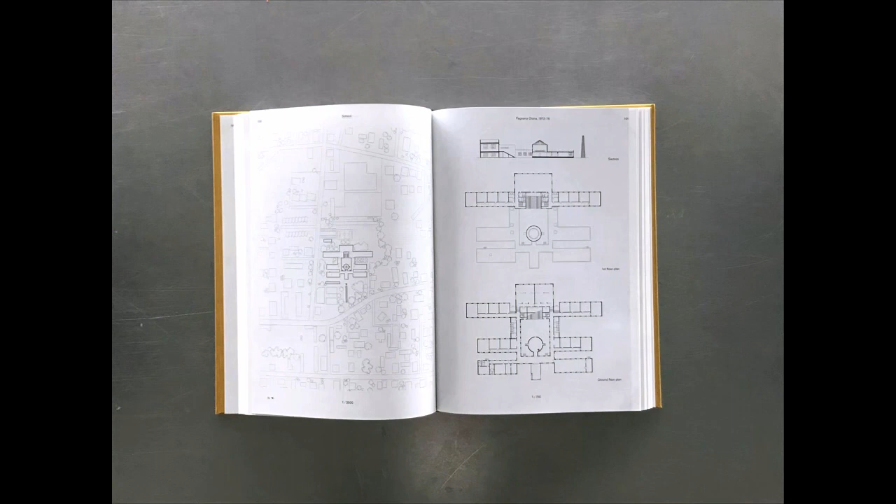One of these, from a few years ago, is called The Urban Fact — the better English translation of Fatto Urbano, commonly translated as The Urban Artifact by Aldo Rossi. We try to connect his ideas of architecture of the city not so much to city restructuring, but to the fact that in that era, 1966 and the 10-15 years after, he was essentially working in Lombardy, what you could call in French the pavillonnaire, or the ephemeral city, or the covered field, or the large city.

In other words, the work or the imaginary of an idea of architecture and the city through architecture — I think this school is an extremely beautiful example of that, the Fagnano Olona school, perhaps one of his best works of that time. Each of these works tries to introduce a moment of urbanity through an architectural figure, somewhere between an urban trope and a large house.

Here you see some pictures done by Stefano Graziani, with whom we did this show for Finstral last year, and with whom we work very often together, next to Bas Princen, who did a show here once, already more than 15 years ago.

These pictures of this particularly weird school, with its own geometry and symmetries, and how it's placed in a context which seems in full ignorance of these symmetries, I believe has been important for us. Now, of course, we did not start working on architecture after seeing that school — it somehow coincided, but I thought it was important to share.

Another element, and it's about putting flags, of course — another thing I wanted to share with you is a more recent publication.

I think it's from last year, where we worked, through Mendrisio, on Aldo van Eyck and Hannie van Eyck. We specifically wanted to work on architects I always considered quite far away from our own practice, but also on their work after the orphanage. I think any of you know the orphanage, an interesting place, but in a certain sense also killed by its own publicity — structuralism, Team 10, we all know it.

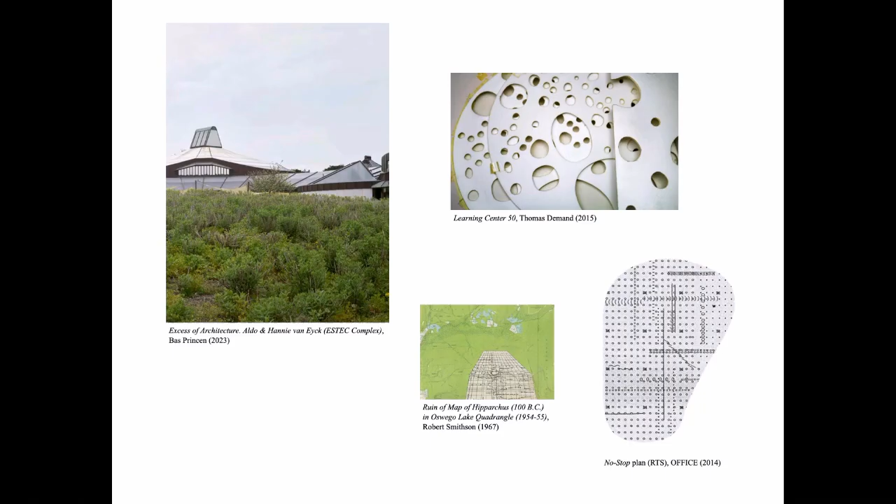So we're in Switzerland. I guess Switzerland, maybe not so much for you people here in Austria, but for us Belgians, Switzerland is this really, really beautiful place with mountains. Of course, you have less of that problem, I can imagine. But we have that in our mind. I realize here the mountains are perhaps even more beautiful, so I think you're safe.

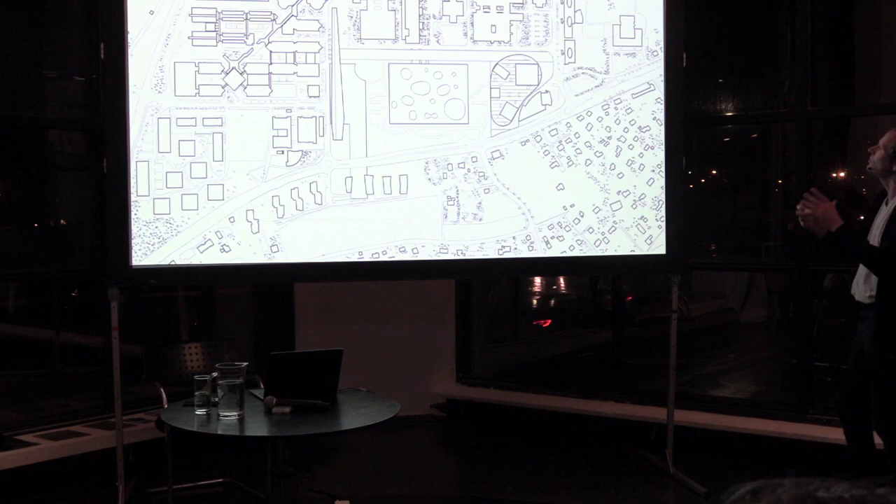But either way, you have this campus, and in a way this fantastic building, very well known, by SANAA, the Learning Center.

You have this pavillonnaire, and you have all this kind of motherboard-like context of endless conurbations and additions of educational facilities. In this competition, we were asked to make a design for a radio and television building, which is strange because it's in a way the only building which doesn't belong to campus. It's not an educational facility.

At the same time, we felt it was perhaps the only place where we could reflect upon this total urbanization of its context, because despite the fact that there are mountains, Switzerland is just endlessly occupied. So the proposal we made was this endless working space, which you see here.

This is the model of the competition, somehow carried by boxes and also interrupted by these very boxes. So you could say somewhere between these two very famous, well-known models. Here you see it collaged inside. You see a couple of versions.

That's one of the early versions where there's a couple of émergences, as we call them in French, a couple of volumes carrying this ear shape. The ear shape is there because the site is like that.

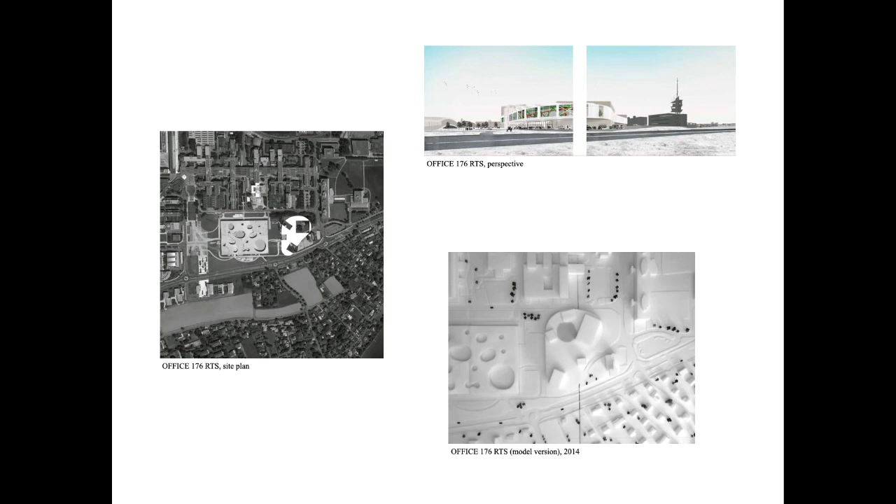In a way, I guess we wanted to round the corners in order to make it as endless as we could, not to have abrupt cuts, so that the cuts made by the volumes themselves were more present. Now the cutting itself, and it's a theme which comes back, was important for us, and it's this kind of interruption.

You saw it also in the Campo Marzio reference, which I went over quite quickly, but you see it very much in all these works of Baldessari, and here perhaps this one the most clear, this square he puts in the scene, and you don't understand the scene is under tension, and in some way the scene becomes field-like.

So here you see that. There was, of course, another theme, perhaps, that kind of inversion of the learning center, you could say, turning it into a far more pragmatic building.

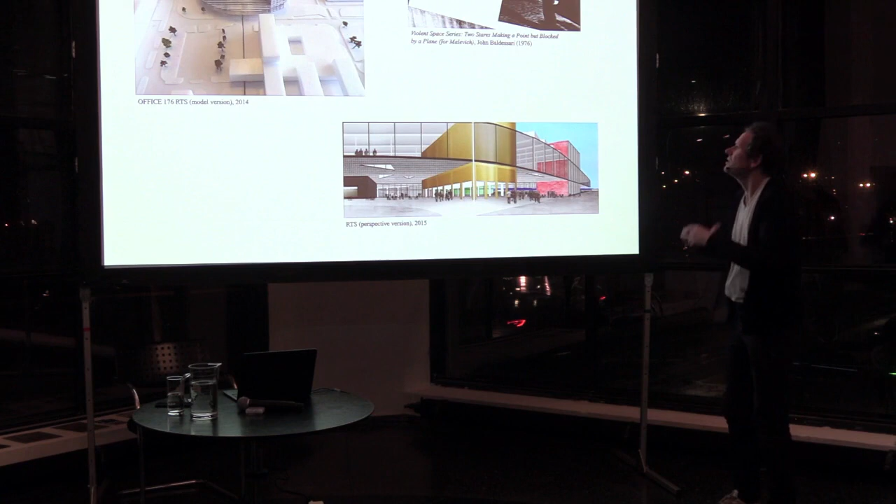I love the learning center, but in some way it's an extremely open, light building where not so much has to happen. In our building, of course, it's a place of production. It's radio and television—there's a lot of kinds of production, but it's a lot of that.

So this developed, and I'd argue that in a sense it's a building without exterior. It's just in a sense an endless interior, carried and interrupted by these volumes, an exercise simply in: if architecture becomes the world, what can you do?

So in a way you have open space and you have enclosed space. You have boxes in which things happen, which can only happen in boxes, which need protection, sound protection, organization, spatial organization—things which also, by the way, change.

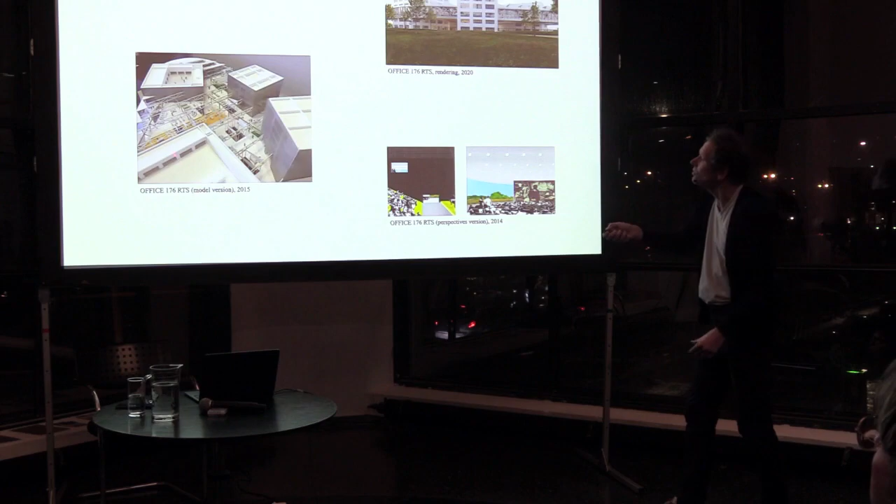As I said, we won the competition now 9.5 years ago, and then we went through processes and processes, and that's also why I like to show these different images of different stages. This is a fairly early version, 2015, 2014, I think you saw before—I have to check—but this one, 2014 again, and then 2020: basically the building as it had landed, as we finally designed it for the client.

So what I find interesting in this is that it defines—and it's weird perhaps to start with such a big building—our kind of toolbox as architects, which is on the one hand a very, I would say, obsessive formalism, this kind of four squares or rectangles carrying this ear.

At the same time, these squares and rectangles endlessly transforming and changing, because we never know what happens inside, because media has already changed so much over time. At the same time, allowing somehow in its formalism that change.

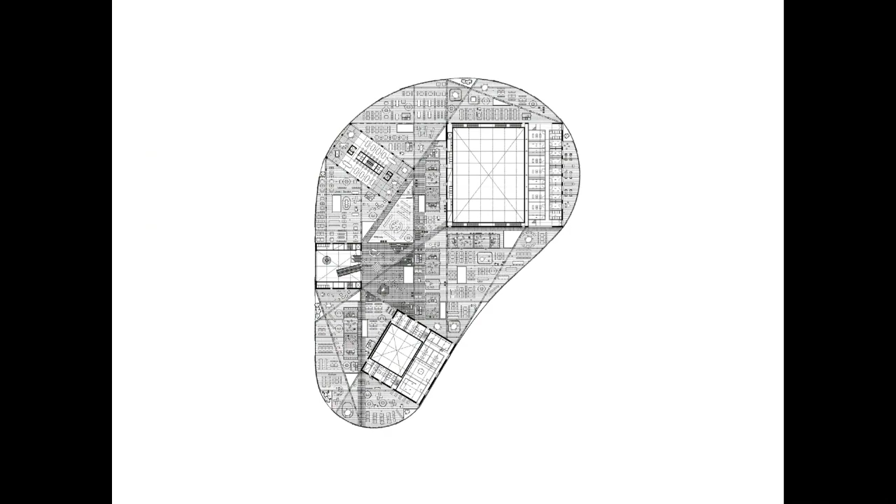So here you see it on the ground floor. Now, if you want to know—I guess it's everywhere the same. I mean, not yet in Belgium, I'll come back to that, but in Switzerland they have come to the idea...

...that you don't even need real editing spaces and recording spaces anymore. You just have big halls, and then the recording and editing trucks park next to them, go to the garage, are repaired, and the moment a certain event is finished, they drive somewhere else for the news or something.

So in a weird way, this building becomes partly a production of content, partly almost like a fire brigade—big trucks locked in, almost like plug-in city in some sense. And then somehow, a mixture between campus-like buildings, blocks, and this big field on top, as you just saw.

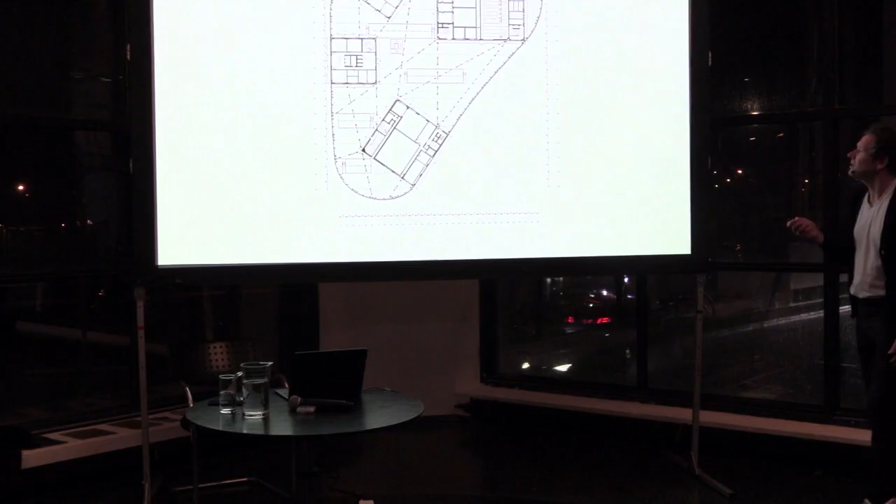So here you see it is now under execution, these are the sections that still think of the competition. Here, in a way, are the images we had to make for the client to help them understand what we're actually building at this moment. Interesting for me is this idea that a building which is entirely rational, entirely open and entirely closed at the same time, ends up like this.

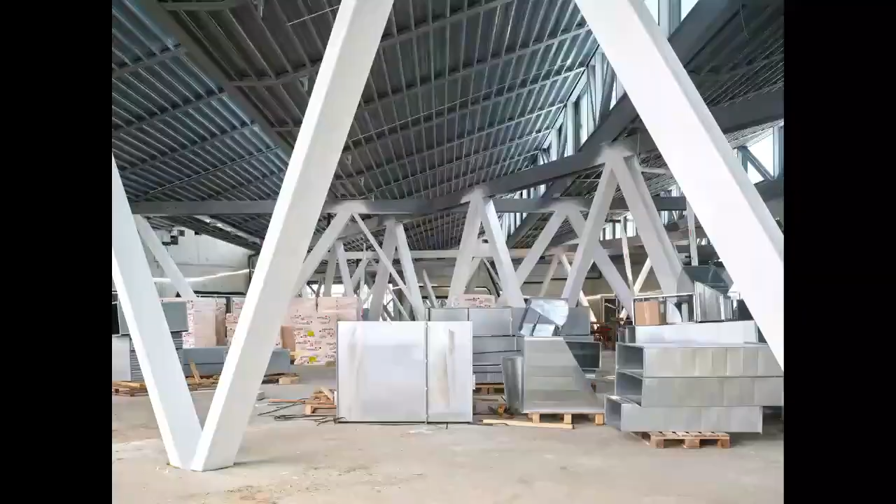These are construction site pictures by Bas Princen, where you see this multiplication of everything: multiplication of beams, sheds, and now temporary pieces still to be installed, the ducts and installations. But all this is a kind of hypothetical answer on the biggest possible scale of what happens if a building becomes a city.

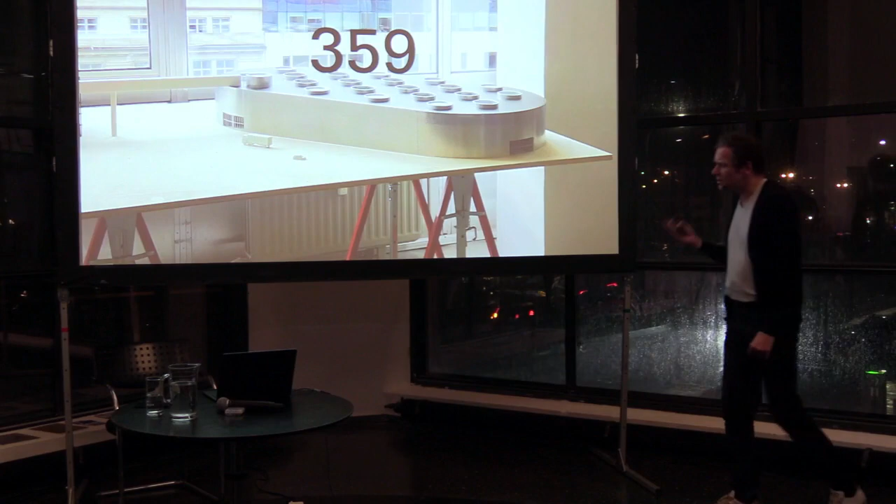Where we were asked - it's a French-speaking part of Belgium - to think of a new building for a satellite factory, so a factory which makes satellites. In a context like this, everything goes on the one hand, but I believe the building you make has a certain sense of responsibility. So what can you do? Is there still an action you can make? Is there still a maneuver which makes your building more reasonable than any other one, you could argue?

So here we come - I don't know if we succeeded, we will start building it I think in about 4 weeks. In a sense Charleroi, and here some references, has this beauty which is also, according to many people, its ugliness - the fact that everything is artificial, even the landscape. But since these terrils have been left alone for about 50 years, because nobody knew what to do with them, they became natural themselves - all kinds of plants and trees growing on them, and now they're even part of big trails and so forth.

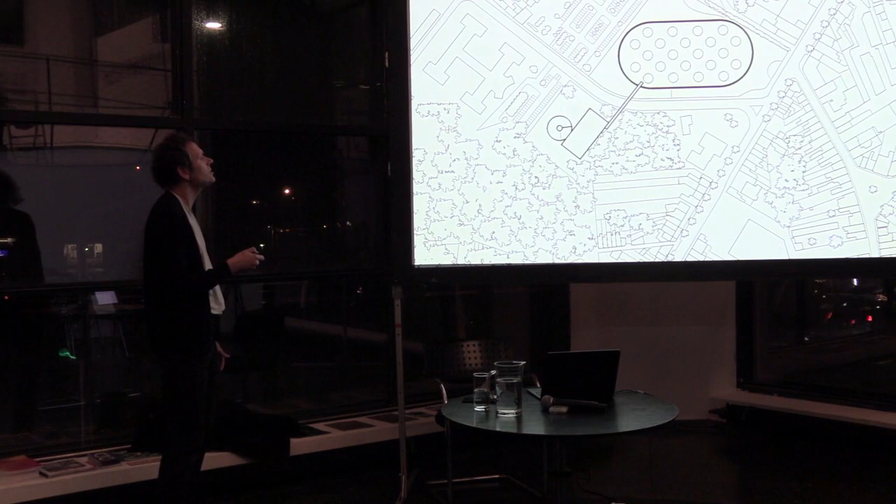The site was given to us, but we had to convince people - the mayor, who I think is a very enlightened figure, plus the people investing in this satellite factory. It's a kind of startup growing very fast, a sign of this new economy in this part of Belgium - to make their big salle blanche, a big white hall to make satellites here, to negotiate the figure of the building, to put the offices on top rather than on the other side where they initially thought, and to keep a building I'll show you in a minute.

It was an old office building from the 60s, a very beautiful building with an exoskeleton in corten steel. We used it as a parking lot, as you can see here, with the ramp we added, rather than getting rid of all these beautiful trees here - in this patch of Charleroi, every tree counts, every piece, even if it's an artificial landscape, we should keep.

So in a sense, densifying everything by transforming a building which was in a way unsavable - because insulating this exoskeleton would be impossible - turning it into a parking garage, making a bridge, and putting the offices on top of this building. So here you see an idea of the scale of what we've been working on.

I can skip this quickly, but it was important for us to understand better what we were doing. We had been working on a project in Bordeaux - we won a competition years ago, but it never got built, a kind of weird industrial building there. Somehow it echoed here in this project in Charleroi - this picture of the corten steel building, very beautiful at the time, now totally derelict, sadly so.

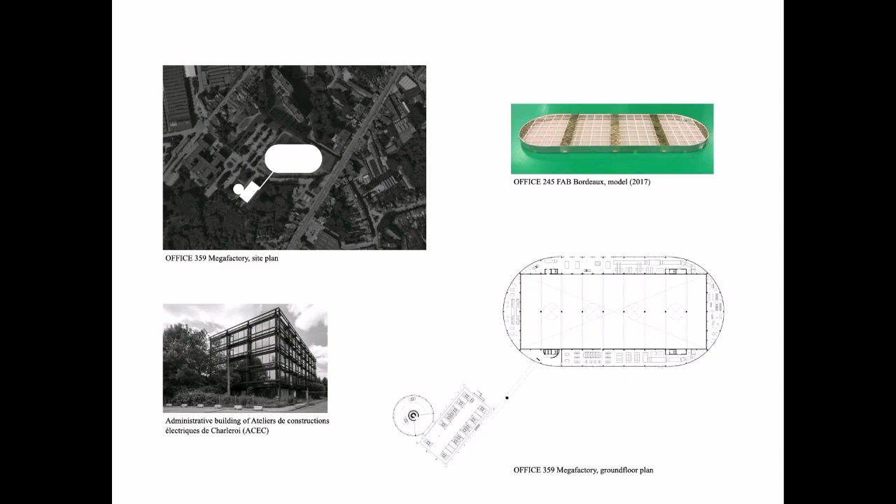So here's the scheme, as I explained before, with the urban scheme. Here's the plan - you see the top floor with all its holes, which is the office floor, and then the parking garage next to it. Here you see that again in detail.

You see, we'll come back to that crematorium later, which somehow explained how we saw the materialization. It's all very cheap - we're not working like the Switzerland of before. It's a very cheap building, but for that reason equally urgent, differently urgent perhaps - and then indeed this salle blanche included in this bigger pill shape, with the offices on top.

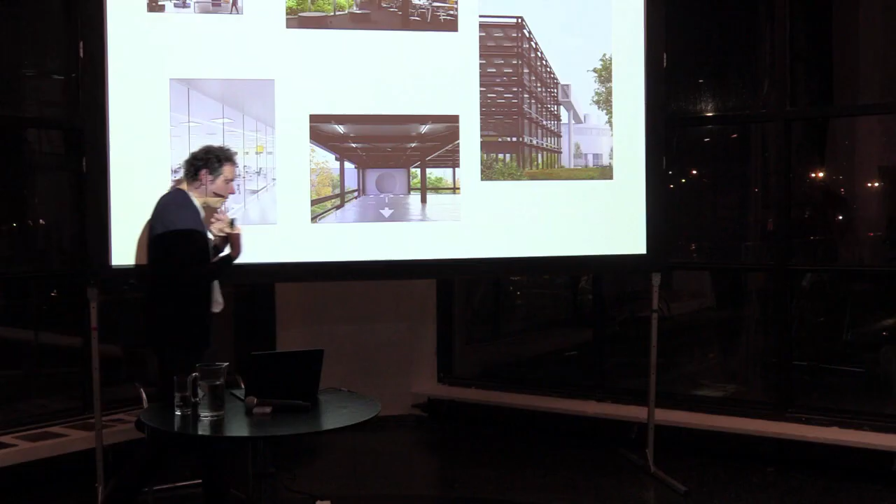So here you see an image of the top of the offices - the difference between the outer envelope and the bigger box, which creates these spaces on the ground floor, the view of the salle blanche, and a view of the building transformed into a garage with its bridge. The building looks almost like it was, but with all the windows taken away, simplified, and through that facing its new life.

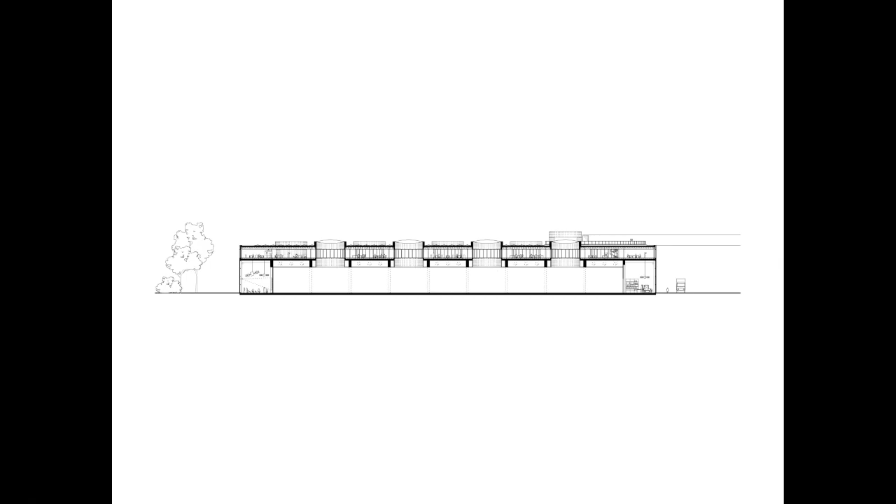So here you see that - where this big figure, like a gigantic box, is in a way the potential answer to that weird context. So I think a picture here - we see through to inside, the place where they make the satellites, and the offices above. I wanted to show it because it's almost the inverse of what you saw before, but yet I think it deals with similar topics.

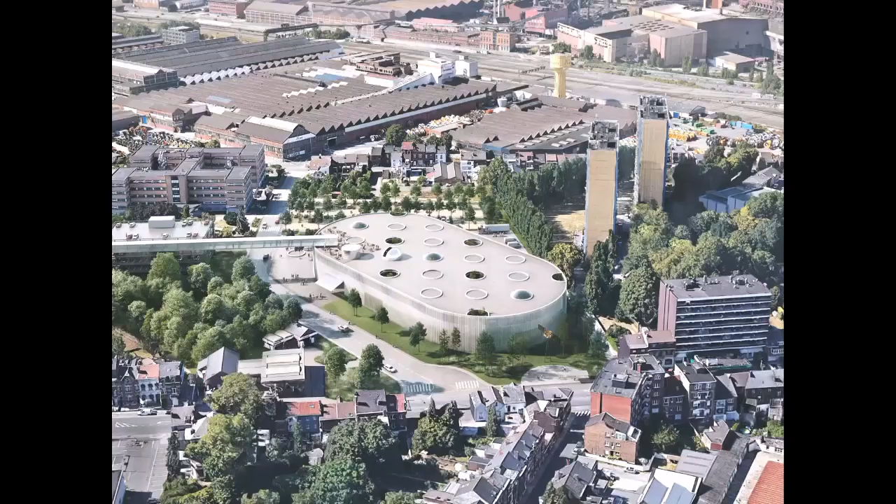It deals with the problem that these buildings in this context have only themselves. Because they have only themselves, they have a tremendous responsibility for how they transform context, and a tremendous responsibility towards their own figure - the accessibility of the roof, the bridge, the existing building, the ground floor, everything. None of it is deeply accessible, yet enough to make city through one simple gesture. You see here how the scale deals with all the scales around it, whether the housing slabs or the former industrial buildings.

So, Charleroi. Now we make another jump to another place, very different, and I'll go very fast over this one because I have too many projects. I apologize.

This is an artificially planted set of rows of trees. It's an old project, so I'll go very fast. But for some reason I was endlessly thinking, do I keep it in, do I keep it out, kick it out? So now finally it's in.

It's a drying hall, nothing more than a building which dries plants. What I like about it here in this context is the notion of artificiality and green. Essentially, it's in a tree nursery, as you see it here. That's the main street, and all the rest belongs to this nursery.

Some of it is very geometrically done, others are a bit wilder, because this is a family business. For 2 or 3 generations they have been nursing these trees. They nurse these trees and sell them, for example, for big urban projects where suddenly 300 trees of the same kind are needed, or maybe even more.

What then happens is that the trees should not be wet when they are transported, so they have to go to a place where they dry in some way. Not dry entirely, but with no water on their leaves, and then they are transported. So this is what the building does.

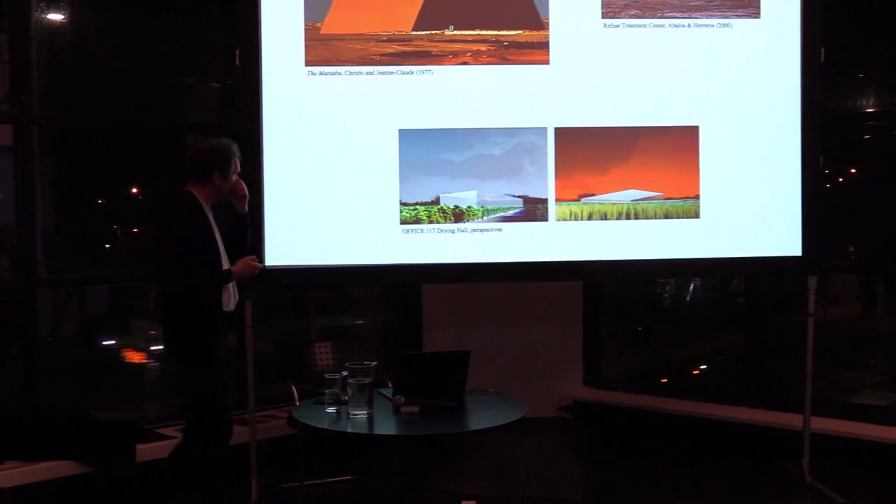The building, in this artificial landscape, is a box, like the one you saw before. It's box-like in all its aspects. It's one of the earliest versions we had in our office where we tried to work with this corrugated aluminium, which we've used forever because it's an extremely cheap material. It's stiff on itself; the corrugation makes it stiff.

The perforation, in this case, lets wind blow through it, and the geometry of the building makes sure the water just does not touch the trees. So essentially it's a building where the trees are in for 24 hours, like a hotel for trees, you could say. After they leave the hotel, they're gone.

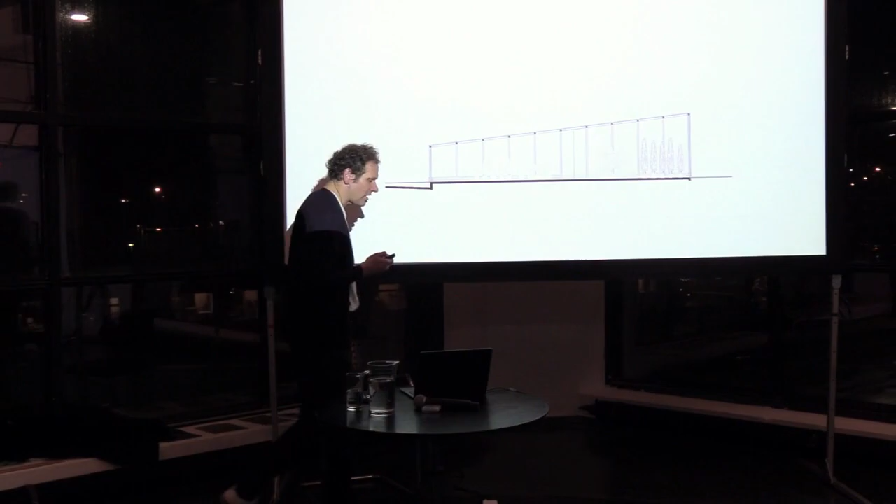I like the building because it introduced many things in our office. Whereas the complexity of the first project perhaps summarizes many ideas - form, figure, city, urbanity - this second one is much more, I'd say, a child of this project. So much a child that it is really an investigation in material and detailing.

The building is only interesting because we could get rid of all these typical profiles, where the roof touches the wall or the corners, how you integrate the doors. Doors are strange and have weird sizes, and then there's this weird geometry. I already mentioned it - all pictures here are by Bas Princen. You see this kind of strange hybrid also.

And what comes here is our interest in paint. In a way, this is a wood-laminated kind of beam on a steel column, both painted the same green. In a sense you see them as one gesture.

Whereas here the beams are where the corrugated aluminium panels are held, they carry the wind loads from there to there. On this side you'd have the same, but there you paint them in the same color as the facade. In other words, paint makes you understand the project. So when there's no money, paint always saves you.

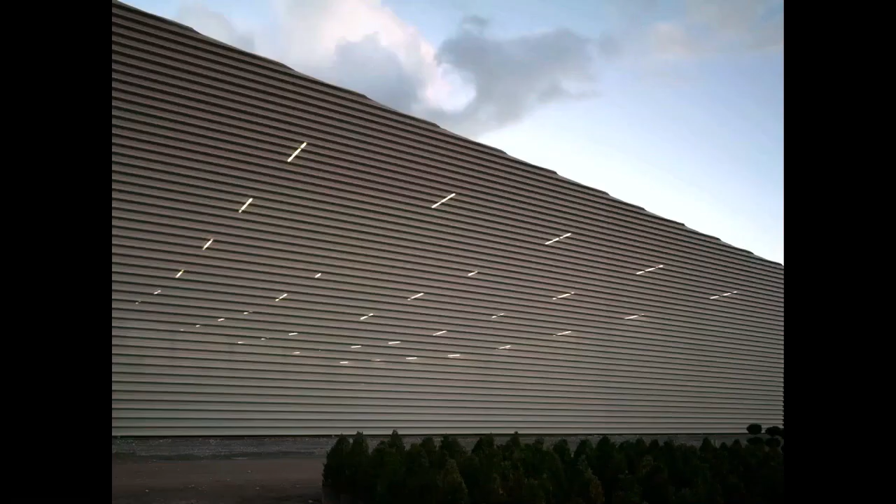So here you see that, from inside to outside, with the extreme transparency of the building, and sometimes the opposite. I wanted to show this intermezzo project quickly, to jump into this other sloping roof project, and then they will come - we have a few of them. We're far from finished, I'm sorry.

But it deals with this artificiality of our current, so-called natural landscape. The tree nursery is obviously artificial - every tree is planted, every tree is there to be sold. This, however, the outskirts of Ostend in Belgium, is actually the same. So what are we talking about? It's a crematorium - I'll show you about the crematorium.

It will be placed here. It's a competition we won about 10 years ago, I think. What you see here is a landscape. The landscape, as you see it with all the trees, does not exist, not even yet. The landscape looks more like this today.

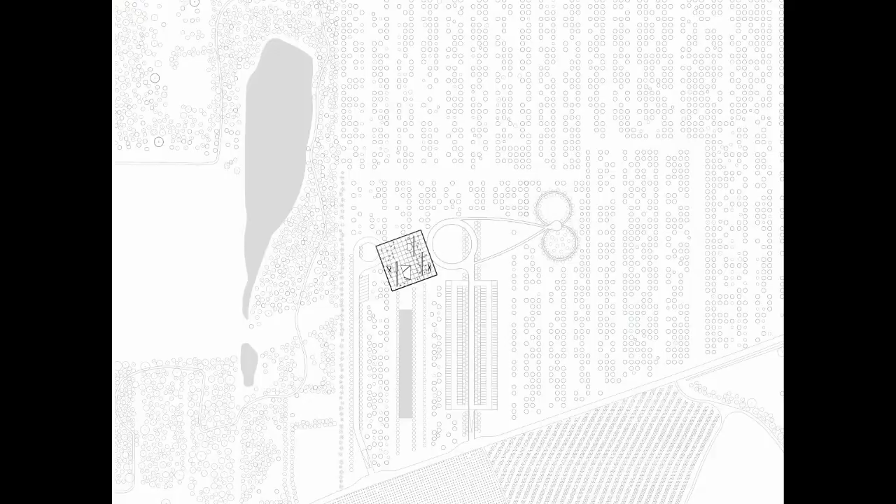Now it's all polders, and as you know, polders is not the landscape here, but land artificially gained from the sea. In a way it's irrigated - it has these dikes, it has lines of trees. The trees are there to keep the dikes alive, the dikes are there to keep the trees alive. It's under zero, so in a sense this is a whole complex system of irrigation which makes this landscape stand - in that landscape, outskirts of Ostend.

Ostende, but not so much outskirts—because in their head it's the outskirts, the way people used to build hospitals and cemeteries outside of the city, and very often the city today is there. The city is part of it, the city grew. It's not different here, so the city is already there, our leisurely city. I don't have to explain about the leisurely city where people climb and do downhill mountain biking or skiing, and there they don't do that, but they certainly hang around, and that is part of it. So our proposal was—there was an old kind of brick factory here on this whole site.

We got into the competition to move the building quite deep on the site. We originally, with Bas Smets, the landscape designer we worked with, had a very long road into it. They were somehow against it—it's a long story—but either way, Bas suggested making this set of parallel tree lines, having access to it, and then approaching the building from the lowest side. I don't know where you see that best.

Well, you see it here on top, but I hope you have a better view here. So I think this view on top explains it, and I think this was a very important idea.

So how can you make this building, a crematorium—one of the last contemporary programs often still built by the state—although seeking some kind of symbolism, it's complicated, because many people with many different belief systems might pass by, many different belief systems might be cremated, and their families, their friends might be around. So in a sense you're looking for some kind of symbolism. We worked on this together with Richard Venlet, the artist, but at the same time it cannot be too specific. It's not a church, but it does replace, for certain categories, the church in some sense.

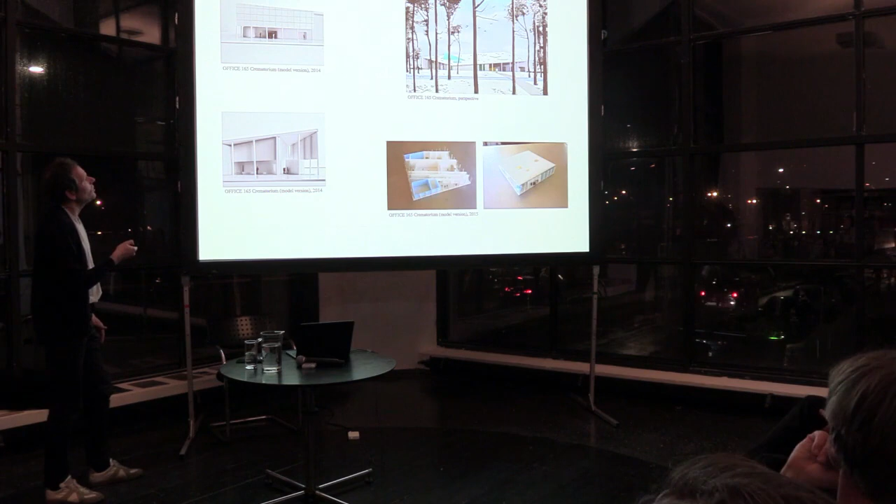So what to do? It's a building which is super pragmatic, and at the same time—here you see the original plan as we did it with Bas—but then the Green Party stopped this plan, which is rather crazy. I mean, I would vote for them, but not after this happened. Because there were too many trees, weirdly enough.

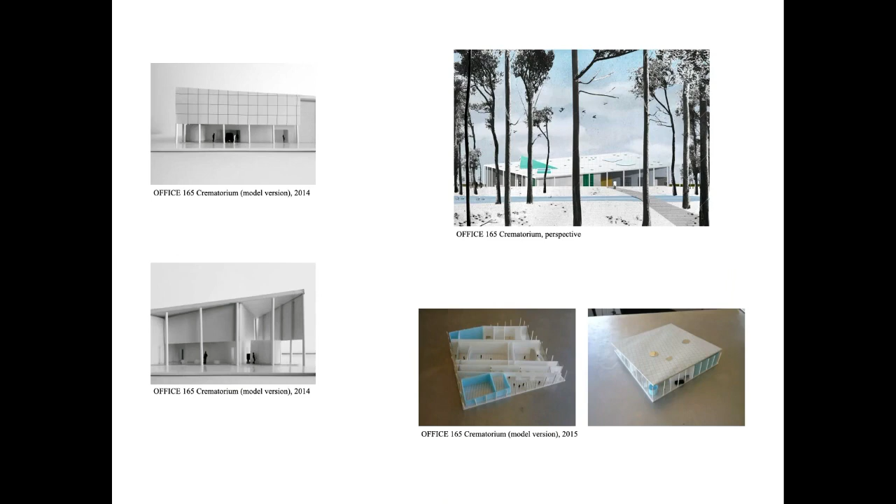But okay, so the point is: how do you represent this in a way, this problematic program? In Belgium, I think now about 60% of all people who die are cremated, so it's an enormous amount. We thought, together with Richard, to make this kind of 'nature morte'—still life—a fifth facade, a table flipped in some sense, so that you would relate this kind of composition to the, in a way, artificial nature around it.

At the same time, it's a big box—it's a gigantic table, this is 50 by 50 meters. This box of 50 by 50 meters, the tilted table, the columns around it—it allowed us to organize, as you can see here, a set of parallel spaces following this tree logic. We have the cremation spaces in the back, the service spaces, the mid-sized spaces in the front, and then the lower spaces where people enter. So that was a bit the thinking.

You see that here in the final plan. Here is where the machines happen. Again, there's a rule that people do not want to see smoke, so cremation should happen in silence, so to speak—it should happen invisibly. So you have to find a way to make these objects on the roof, which even include a smokestack, but which will not emit visible smoke.

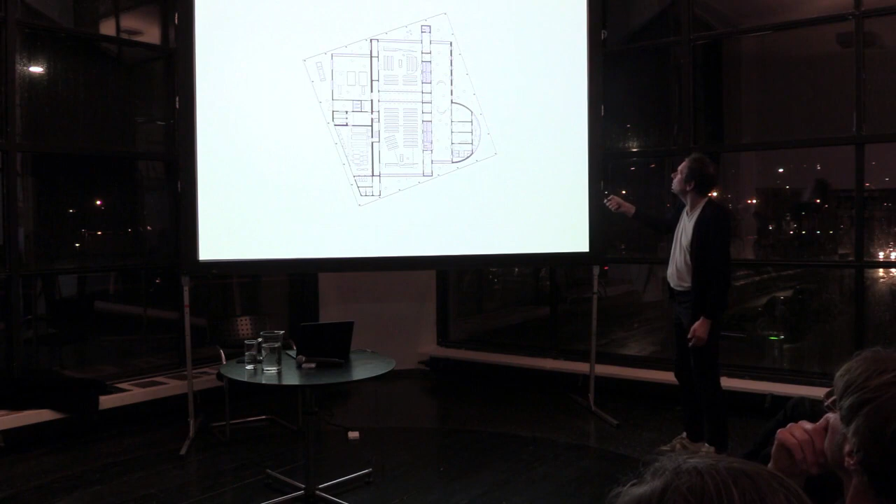At the same time, you need a lot of volume, a lot of height, a lot of space here. These have to be generous rooms, of course, and then here where people gather, we decided it had to be very low, very intimate. So that's the section you saw—that makes the table, that makes the nature morte, the still life.

Here you see, it's actually an entirely different building—it's cut here. This is non-insulated, single concrete, produces a lot of heat, as you can imagine. And then, I know many people might not want to hear it, but we heat the building with the excess heat of the burning of the bodies, which is extremely logical to do. But of course, if you tell people that, they're always a bit like, 'ooh, that's strange.' But well, we should be responsible.

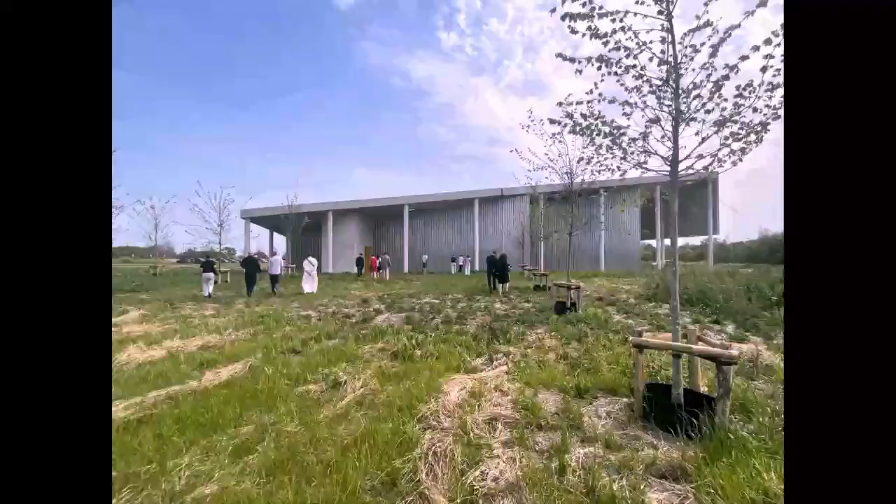So here you see that building in its landscape about a year ago. Bas Smets—in this case, not Bas Princen—kind of fought forever for his vision. This is Bas Princen's picture of a landscape not yet done by Bas Smets, but with our building. Here you see that Bas then finally managed to plant some of his trees, which are part of this interpretation of these polders.

And you see them here again - the picture is a bit mixed. You see how that table has this set of parallel walls, and these walls almost work like different stages in an organization of space. So here you see it again from the front, these objects which are in a way these light objects to the main halls.

This is actually the chimney. Then you have all these other halls, and this is inside. So the furniture is a whole story - we worked together a lot with Richard on this. I mean, the furniture is fixed.

The air comes in because, as you can imagine, people need a lot of fresh air in these kind of occasions, and all of this is done with the most precision, but at the same time with an enormous economy. So this kind of concrete wall carries that part of the roof. The infill are at the same time the sound buffers. The floor is very simple, and then you have these corrugated panels on the outside, which make this slightly filtered, almost curtain-like relationship. So here you have one of the ovens of the crematorium itself, the cremation ovens, and you see this relationship.

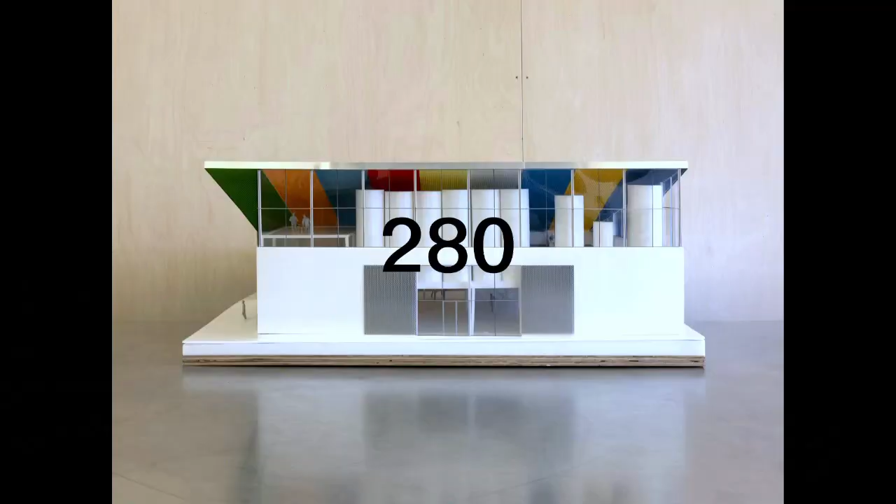So that's the building, that's the landscape, and we move on. What I was interested in sharing with you here is many things. This building is ultimately an extremely pragmatic box, and perhaps what you remember of it, despite all its precision...

Is this roof, this sloping roof, which somehow is the main figure, has these columns which don't really carry that much, but which somehow tell you - am I a table, am I a still life, what am I exactly? So as a big figure, who knows, a big house.

So here we move to Brussels. It's a brewery building, a building we won about 8 years ago, I think - I don't know, I should check the date. Maybe 2018 it says here, so 6 years ago, so 7 years ago indeed.

And it's a brewery. The competition was for this company called the Brussels Beer Project, and they have this particular branding. All their beers have this kind of colors in some sense, but they always change because every 3 months they make a new beer, and then the colors are different or the combinations are different.

So I guess in the competition we thought, how can you make a building, and we are in this brewery, right? And Belgium has also these buildings - I mean the current Kunsthalle, say, of Brussels, the Wiels, is in this building. It's called the Wiels because Wiels was the beer brand. Very much like here, that was a former brewery with a beer brand.

So there was a tradition, certainly in the 20s and 30s, the heydays of these kind of semi-local beer brands, before they got totally internationalized and eaten up by these gigantic conglomerates, where these buildings were built for, I would say, the craft of making beer, and as a showcase. As here we used to have these vats, very beautifully so, with the window, right? Not looking at me from outside, but at the beer vats - that exactly was that tradition.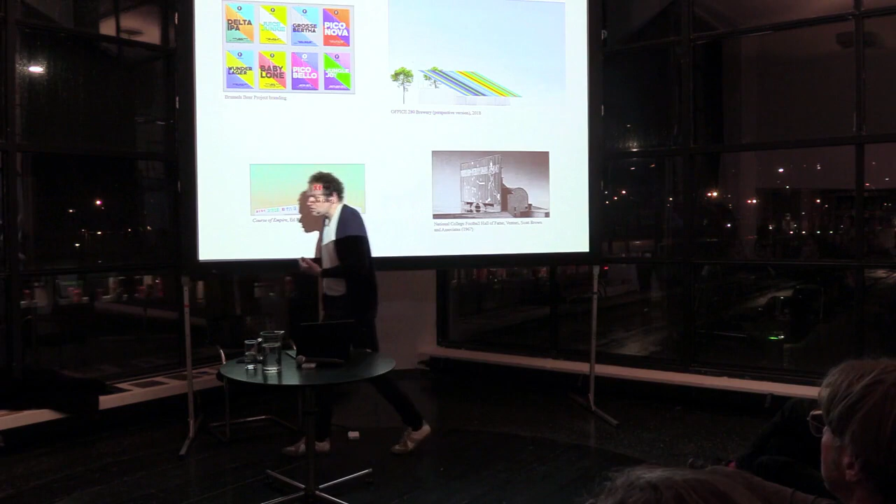Now, funnily enough, with an influx of, if you can call it like this, a hipster culture, which is very interesting because I think this current culture embraces the craft, whether it's bread making, beer making, bike making, and so forth. There's a new interest in embracing this craft-like industry, somewhere on the edge between the two, and trying to find a representation for it, and making buildings for it. So there's these small, mid-sized entrepreneurs - I find these guys, they appear small, but you could say they're quite quickly mid-size, and they want that building. So we made that project.

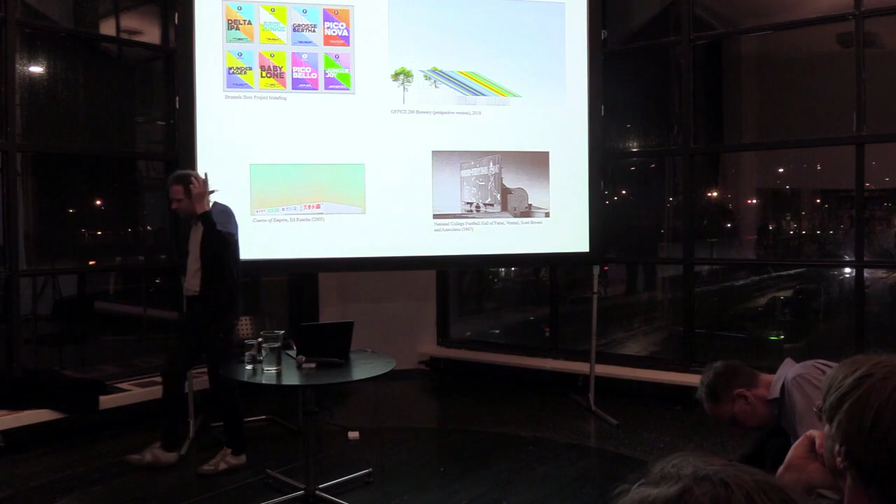We had in the back of our mind many thoughts, as you can see here. But so we said, can you make a building which uses these colors as a gigantic flag or as a kind of big tent or something? And I don't have the image here, but I guess many of you know the Pomona Temple of Schinkel, where you have this funny temple, and on top is this weird kind of tissue roof, this little pavilion on the pavilion.

That was somehow interesting to us. Here's the Pomona Temple.

So in this context, which is a place where you have the city, let's work in the city, let's have industry in the city. The city has industry at the canal, where there's already a lot of other buildings from the past. Now, sadly, all this is gradually transformed into housing complexes. So here, on the edge, even a fairly poor neighborhood, of course now quickly gets gentrified.

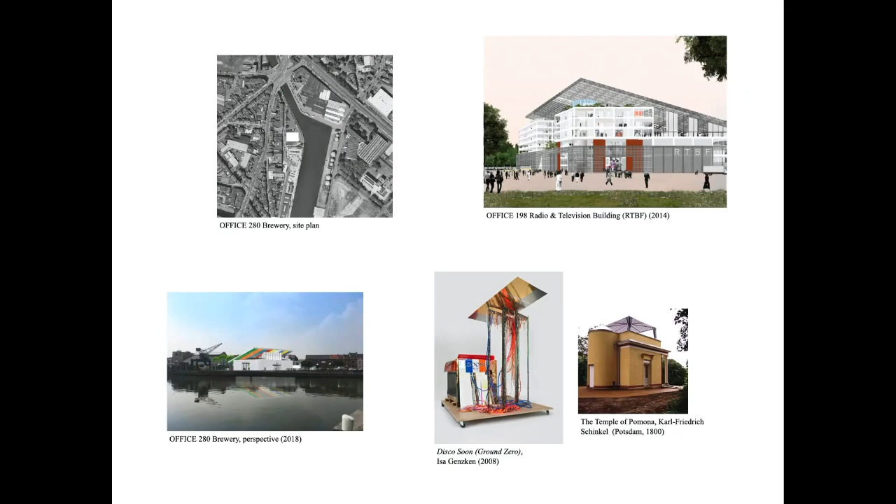You can question that. We proposed then for this competition this box. Very simple building, just a box, so just a perimeter, a wall, 4 openings, and then this roof which kind of lays on top of it, which of course has glass in between.

So voilà, here the roof, remember the roof of just before, but now the roof has color. The roof kind of wants to be a flag, but it's obviously not a flag. It's still made out of corrugated aluminium. It needs all the detailing to make that happen.

So the edges we have to make out of mirror alu, you see it here, so that it somehow disappears. It lays on top, but then you do kind of detailing of greenhouses in between.

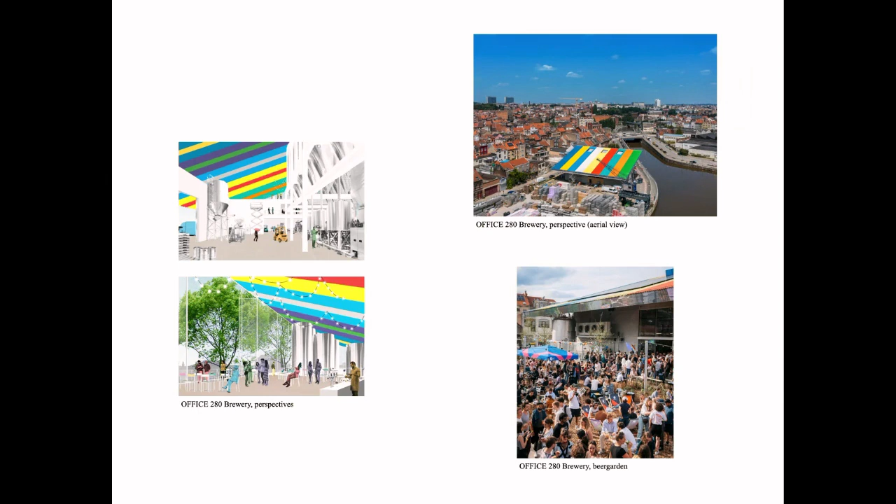It has these symmetrical openings. You see them here already in the early collage, and kind of a bar on the top. And then also a beer garden somehow here, not yet ready, but here below, with all the machines, all this under that roof. So that's the thought.

So here go fast through the plan, this kind of losange shape. And again, there's nothing, you can do almost nothing, but that's the exciting part. So what did we present to do? It's very much in the tradition of what you see here.

So in a sense, we made a set of tables. You see them here with these round columns, steel columns, with the big beams. The beams carry all the vats and sometimes the offices.

In this building, which wants to be a concrete building, but it is not really, because it's a prefab concrete building, so it has these steel profiles as well, in which there's these prefab panels in between. But so painting these steel profile panels in the same way or in the same family as the concrete, so to speak, and turning with another geometry, round section, these tables, making them another family.

I think here is the architectural strategy. So here you see that, you see it in section. You see that these openings, these 4 openings, are symmetrical to each of the facade and are in total ignorance to what happens inside.

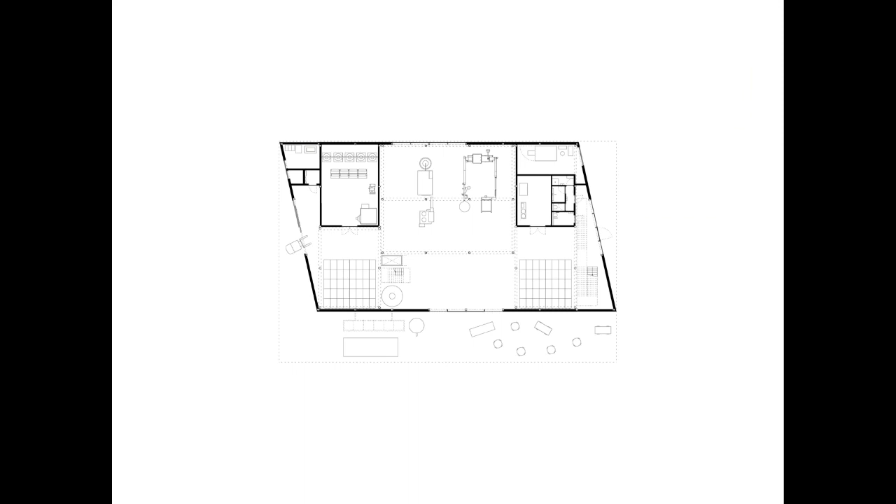So also to give it this kind of house-like character, if you could say. I mean, is that so? I don't know, it's an idea. And you see them also, so the tables do not even follow the windows, like your furniture doesn't necessarily follow the architecture or what the architect had in mind.

So here you see that. You see it here finished, so you see these kind of buildings. You see doors, I mean, they're too difficult to detail in glass, so you just make them plain aluminium, and so forth. So this is how it works.

This is then, you know, the building from the front of it, which is the square in the future, but not yet there. And in the back is the beer garden. I think you don't have a picture.

The alu edge, and these kind of, again, corrugated panels, as you see, the size of them is just, they go from beam to beam. We just had to decide to color the beam in either one or the other color, and so you have that rhythm. And so you have what you see here.

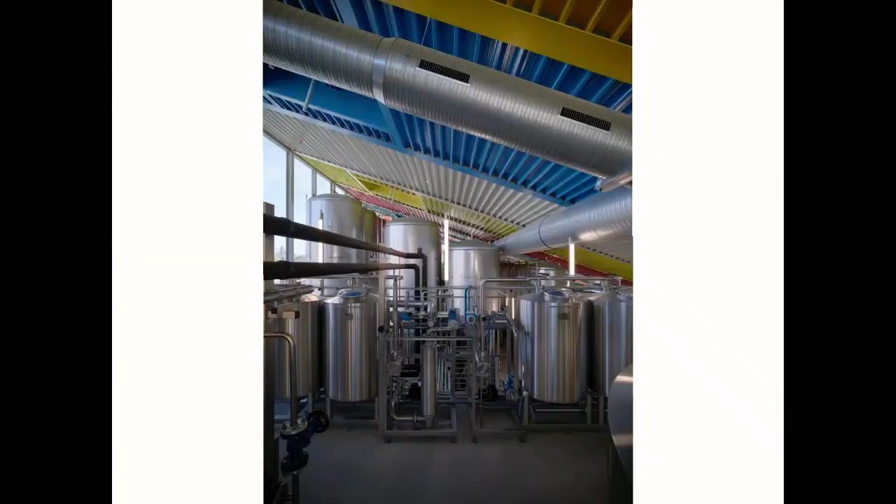So there's a lot of work in there, I have to be honest. A lot of work to get all this tubing right and have everything right. But in a sense, it's work done with the same stuff, the same material, as would have been done maybe with less work. And hopefully then I would hope we did it better than the standard with less beauty.

So it's a house of an industry, a house of a craft. It's a very simple building. It's a working place, it's a big building. It's surprisingly big, this building. As you can see here, it perhaps is a big house. So if I move on again, and that house is not so house-like, but it doesn't matter.

So the technology and how you design with it, I think in this idea of an architecture, which is often not more than the perimeter, you see it here.

So you see an office building, which was always an office building, as you can see here. It was always there. You see the building, yep, that was the building before, and that building, that's now.

So in a way, they have now very fashionable terms for that, adaptive reuse, I think. But essentially, it's what can you do with this building when the decision is, actually we had advised against it, but the decision is to keep that building and to transform it and to make it so-called zero energy, and to keep it for only pragmatic reasons, which is that the zoning has changed.

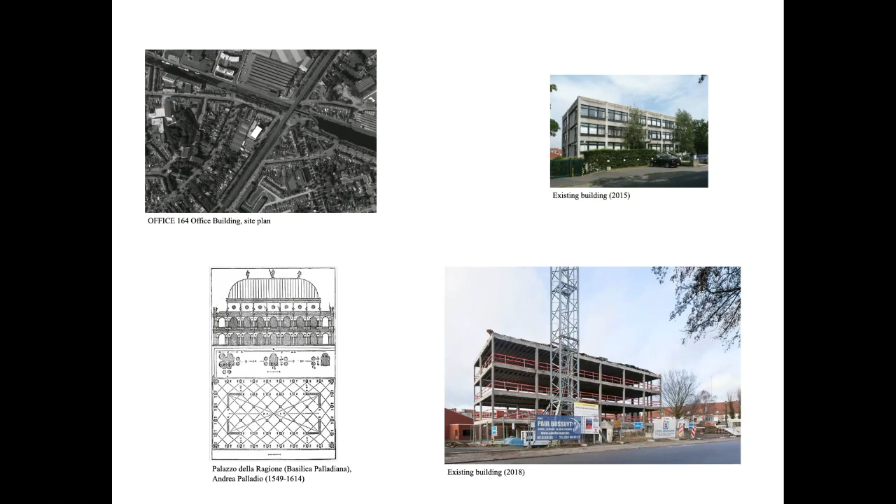And ironically, the province did not want to accept defeat and demolish the building and turn this into housing. They said, no, we want to keep our office there, but then we cannot demolish it, even though transforming it was obviously more expensive, and one can even ask ourselves if you would do the whole energy sum if it was more interesting.

But okay, we know buildings which have been transformed and buildings built around buildings, and then later you forget. I think this is a very good example. It's of course not the same level, but this Palazzo della Ragione is fantastic in that, you go and see it and you think you see a Palladio building, but it's actually just a transformation.

So let's say that was the ambition somehow. Can you transform this building in a way that it's zero energy, that it works in terms of its enclosed kind of ecological system. It works with the sun and so forth, but all the cold bridges are gone, and later you forget. So this is in a way the logic of the plan.

So this is the existing building below, or the once existing building with all its extra outside staircases. We move them in. It has its own logic. It was only cold bridges. Now this looks black, but it's not black, this line, of course.

And then we proposed in a way to make a building only with installations. So all these columns you think you see are in a way only ducts. And the ducts are there to make the airflow through the thing. Of course, minimum machines are here on top.

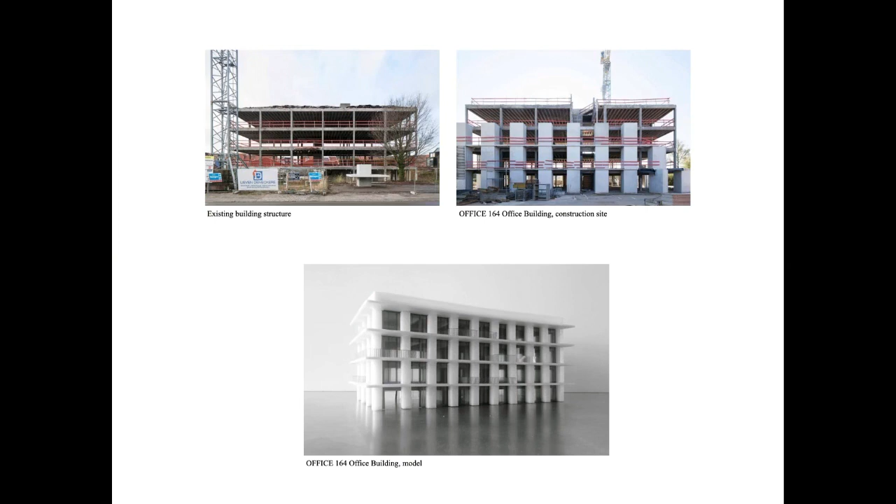And then the structure is the structure which we kept. So this is, as you can see it, you see how the building is built in front. And we thought it was interesting to make a building which looks almost rougher, more brutal, more clumsy, if I could say it like that, than the initial one.

So almost like you turn it into a Flintstones building in some sense. You know, it's a kind of a heavy Flintstones building. And you show also at one corner that it's all fake in a sense, because here we turn one column. You see that here. So this is in a way the building as we offered it, and this is, it's not fake, but let's say it's not structural, it carries itself.

So here you see the plan, and here you see the initial plan. So here you see another time the plan, you see the ducts, and you have to believe me, we use them all. That's the crazy part of it.

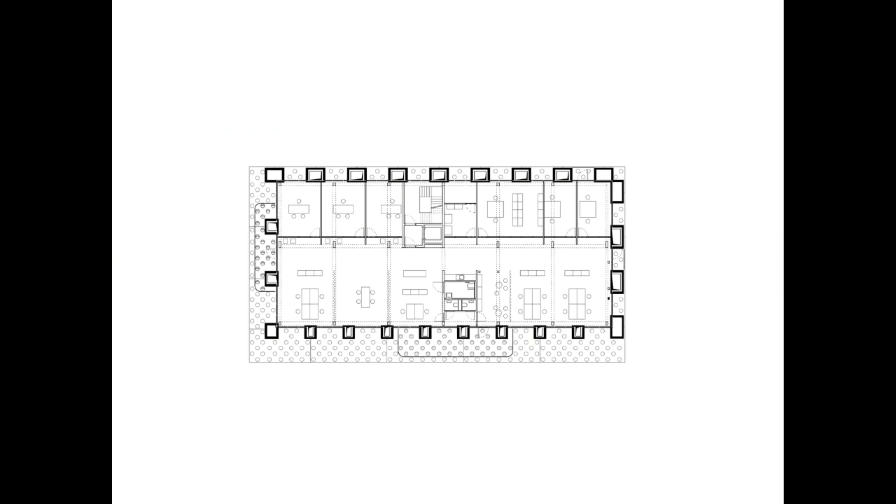And so it works. Also I should mention, so that's of course the north, this is the south, and then we had these plates which stick out, and they're perforated, and they're calculated in order to direct solar gains, minimize overheating and so forth. So this is all there. But of course, if I don't tell this, nobody would ever know. So that's also the nice thing, I believe.

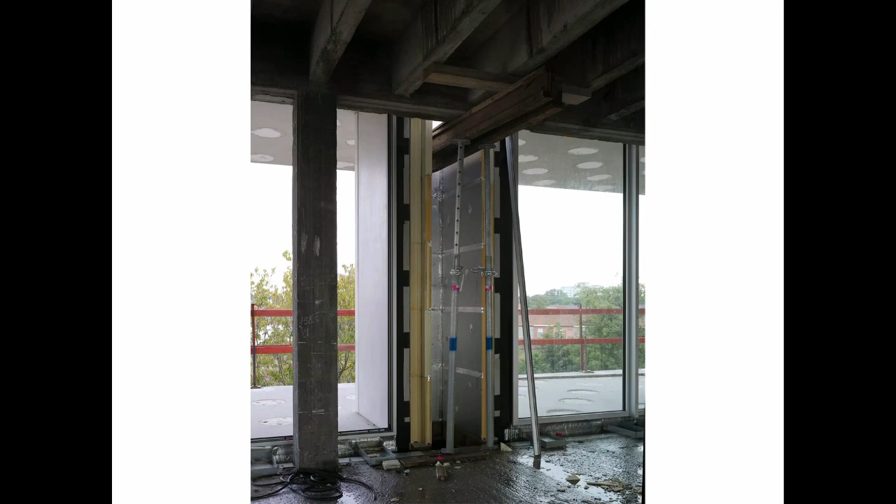So here you see then the construction. See these prefabricated panels. You see the perforations. You see the structure next to it. You see how the structure doesn't fit. There's absolutely zero connection, and the new facade is in between. And here you see it finished with the in and out.

So here you see that we managed to convince the client to ask Rita McBride, the American artist, to make a work for it, or to have a work of hers in here, and this is called Vent. So it's a kind of insane, sculptural, over-designed idea of a vent, which is somehow I would say the soul of the building. So here you see on the outside, and you see that also some of the plates are a little bit accessible. Then we put these glass kind of elements in the holes.

That's a specific detail, so you don't see it. There's a slight kind of angle, but most of it is inaccessible, which gives a very uncanny aspect to the building. Here you see it on the north side, where there's almost nothing, and here on the south side. So we move from that building, which is a reflection on almost nothing. The building before and after is the same.

To this, which is a school. It's a new architectural faculty in Liège, which is supposed to be built here. Am I right? Yeah, I think so. It's supposed to be built in an old caserne.

An old kind of complex, which is less old than people tend to believe it is, but okay. It used to be an old monastery, but the church is gone, and actually the monastery buildings are gone too. What now looks like a historical layer is in a way 19th century for some buildings, and then even 20th century for quite a few others.

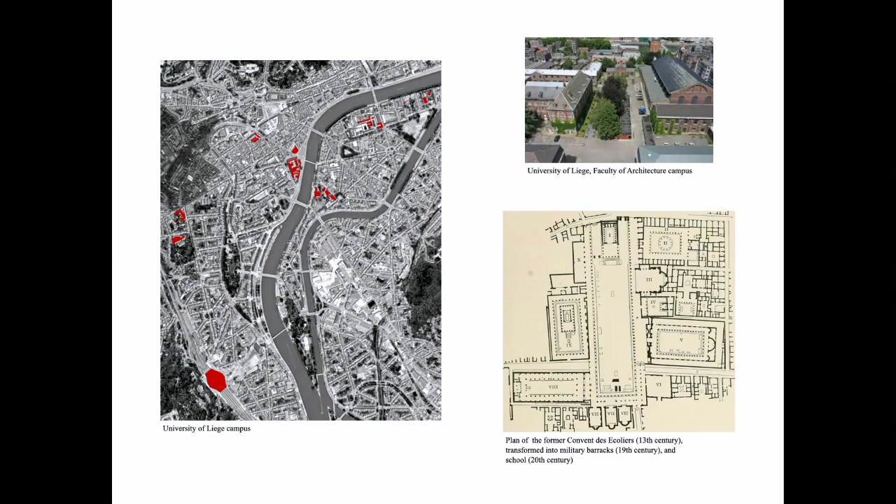So in a sense, there's a lot of layering. And there's this kind of latent space here, this in a way beautiful square. Currently the architecture faculty is housed in here, and the arts faculty there, and something else there. And this big building here is called the Manège, which used to be the horse stable, but is now actually quite a beautiful cultural center.

So the competition was how to, in a way, turn in here in this context, how this is the same site as you just saw, how to make some kind of architectural faculty, knowing that the architectural faculty owns, well, that's strange, but they own the open space here and these two buildings. So not that building, that's already ours, not that building, it's Manège. That building they seem to co-own somehow. So what do you do?

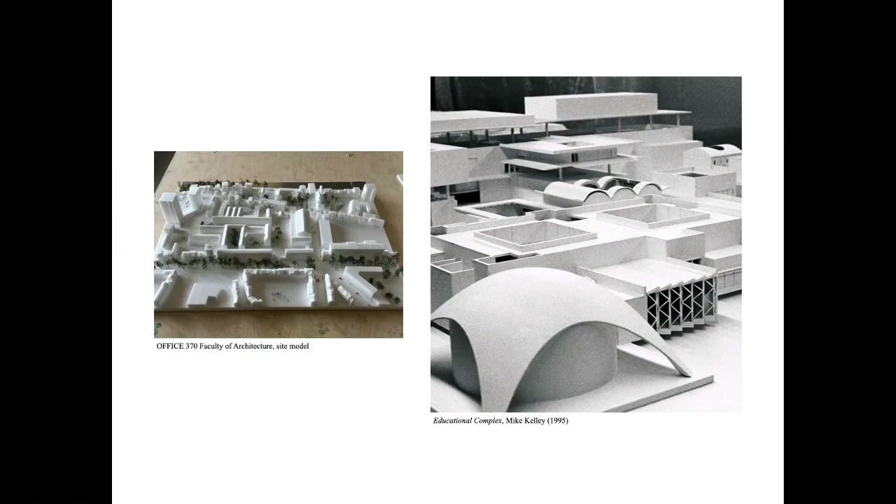So here you have on the right Mike Kelley Educational Complex. Of course, why not Mike Kelley? Everybody likes Mike Kelley. We were interested in this weird model of all his school experiences, which were apparently very problematic, where there was plenty of open holes, and we were fascinated with this open hole. So what do you do with this hole? Then we were also fascinated with the fact that it was an architectural faculty.

So architecture, what's architecture? Any building you do has an ideology connected to it. Any building you do has a program connected to it. Any building you do talks about architecture. If you want to make a building which fits in the current context, what does it fit into? What can you do? So we thought Liège, which is hard for me to prove here, but you should believe me, has a kind of weird tradition of modernity, of modernism.

And we thought it would be a pity to let go and to kind of so-called repair that big complex, this kind of historical context of the caserne, even though it was not as historical as I just mentioned. So that was one thing.

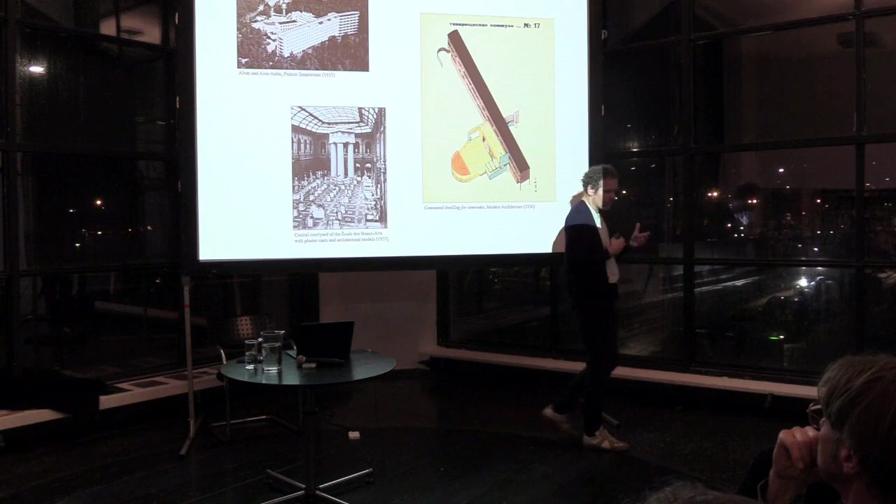And then we were intrigued by the Domkommuna. We all know the Domkommuna, this idea of the big house, where you would live more or less collectively, constructivism. And we saw this model as a model for collective work in an architectural faculty. So combine the Domkommuna with this kind of strange long figure of the Paimio sanatorium.

And perhaps as a second element, a second model, but next to it, this big courtyard of the Beaux-Arts. So in a way, conflicting architectural ideas, because you have to be careful that you don't make an architecture school which, already the moment it's built - and it always takes so long to build buildings - is dated or represents an idea which is already not from today.

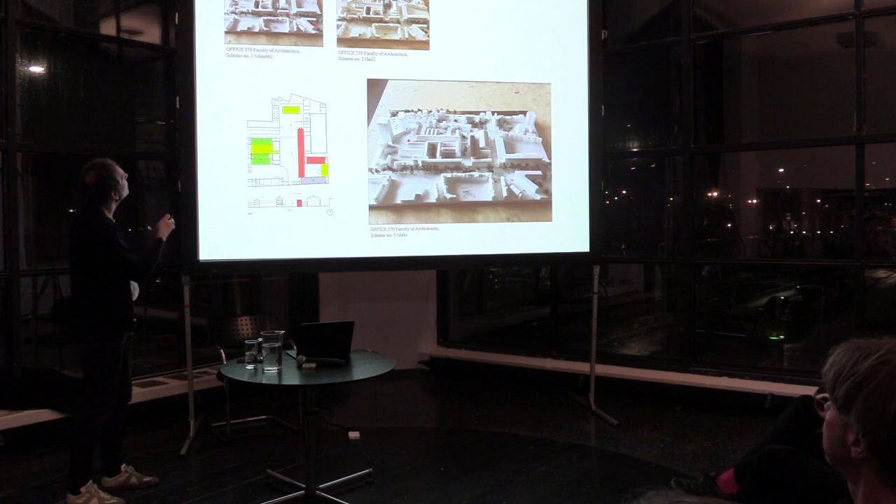So anyhow, to cut a long story short, we did all kinds of other tests, knowing that was their site, and we tried to even take in the whole square and build maybe on the very back, which is only half their property.

We ended up with, as you could imagine from the references I just shared, a very long building which was trying to own this big court and make the architecture faculty visible in some kind of weird dialogue with this, in a way, beautiful, only historical building on the other side. So that was the strategy.

This building was important for us, a building which in a weird symmetrical relationship would stand towards that building and which would turn this complex into a kind of real dialogue with the art school.

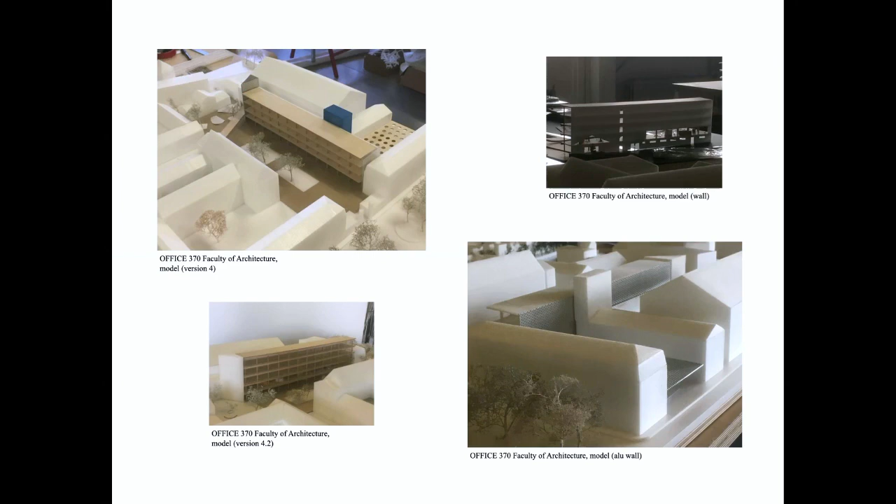So here you see the tests. We made the first ideas, the course, what it could be, and also as a Dom-Kommuna type, as a big structure, as a large wall, you could inhabit and relate to the court. So here you see that, this is the existing situation, this is the proposal. It's like a gigantic, in a way, weird, modernist kind of hallucination, if you want.

For atelier, only atelier. So this is the atelier building. This is the big hall, as just mentioned, and all the other educational things, the classrooms and so forth, are in the existing buildings, in the renovated parts.

So here you see that again in its kind of current section. The hall, all the floors which have a wall, always a wall. We thought it was important to offer a wall and a view. I mean, still a wall, not just computers, still a wall. Pin-up moment, so to speak. Still a wall, and the terrace and the view. So this is the hall then for all kind of other activities, and that's the typology.

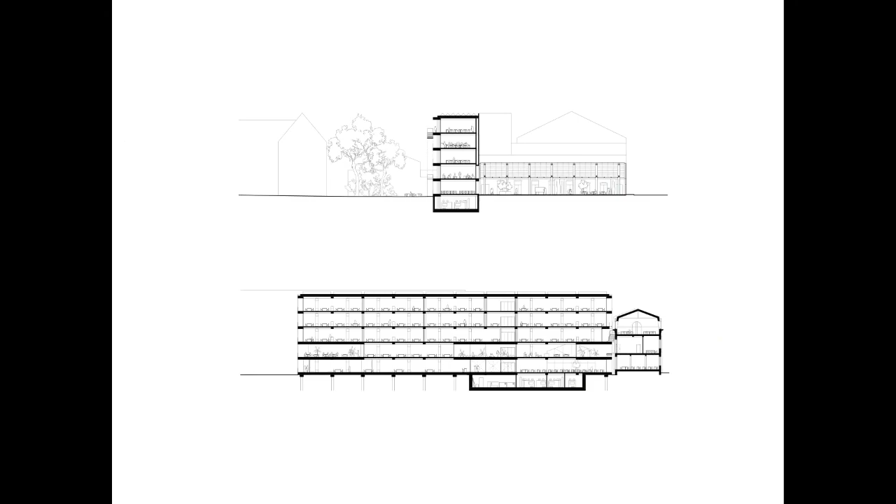So here the wall and the back towards the manège, the front, that's the competition model with, in a way, just these terraces and nothing else, and the columns, and this the back.

We worked together with Joris Kritis, the graphic designer with whom we always work together, and he turned this into kind of a page, you see, Faculté d'Architecture. It's like a gigantic page which is laying there somehow, where the core connecting with the existing buildings is added. This is the hall here, the shared hall for many things, and here we see the back of that kind of gigantic, very long, it's 90-meter long building.

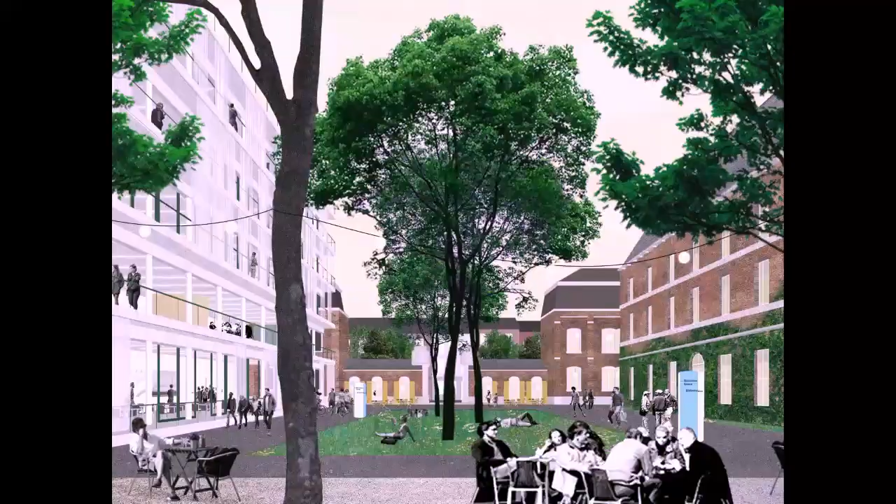So here you see the collage of the competition. A bit of Daniel Buren here for some strange reason, and that fairly audacious relationship to the existing art school on the other side. So here you see it now, how it is finally, finished.

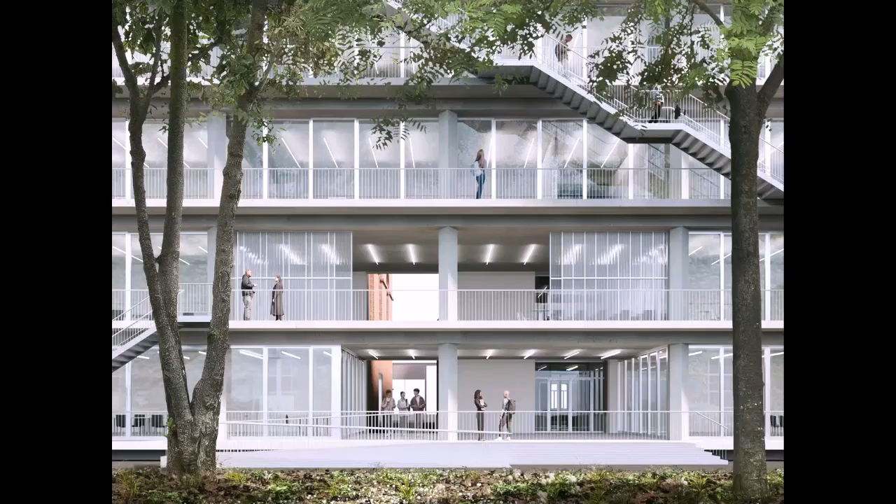Now we are moving to the definitive design. So you see here we actually worked much more on access from the court, which we thought was interesting. You see here, in a way, the detailing of that wall and these plates and these columns and the beams. Anyhow, I'll skip that.

You see the whole facade. You see the classrooms now, which are in a way just studios, and they're not classrooms, they're where you work. There's the wall, there's the table, there's a view. And then the big hall, as it is now currently in a way in its final version, it looks kind of the same as we are now pushing it in its next phase.

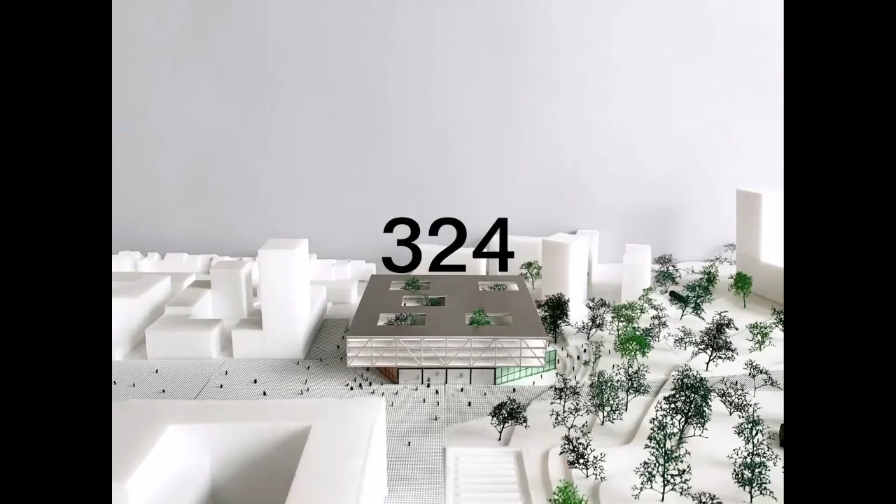So this brings me to this project, and I have no clue how I will make the bridge, but that's fine.

So I think this figure as an insertion, which gives you a complete different idea of what urbanistically is imaginable, is probably the explanation, the jump I would make to this. Whereas this very long kind of constructivist object turned the complete perception of that kaserne upside down, I think this building, this new radio and television building in Brussels, Belgium, might do somehow the same.

It's a building which is supposed to replace the building on which we now stand, which is actually this building, a long slab. Funny enough, the slab you saw before here will be demolished, not by us, but by the Flemish radio and television and the Walloon radio and television. They have decided to demolish this whole complex, build the new Flemish radio and television, and here the Walloon radio and television already now under construction.

Now, this is a sad situation, you could say, and why demolish all this? But that's a decision taken a long time ago. Perhaps the big opportunity at least is that with this building gone, this enormous park will become an urban park. So that's what will happen. This building will go, there will be a building here, this will be our building there.

We won the competition, and as a result, you have all of a sudden a building which in itself has to make an argument. So here you see the new Walloon radio and television, French-speaking radio and television, the kind of pre-park, and then the park. So we wanted to make a building which announces the park.

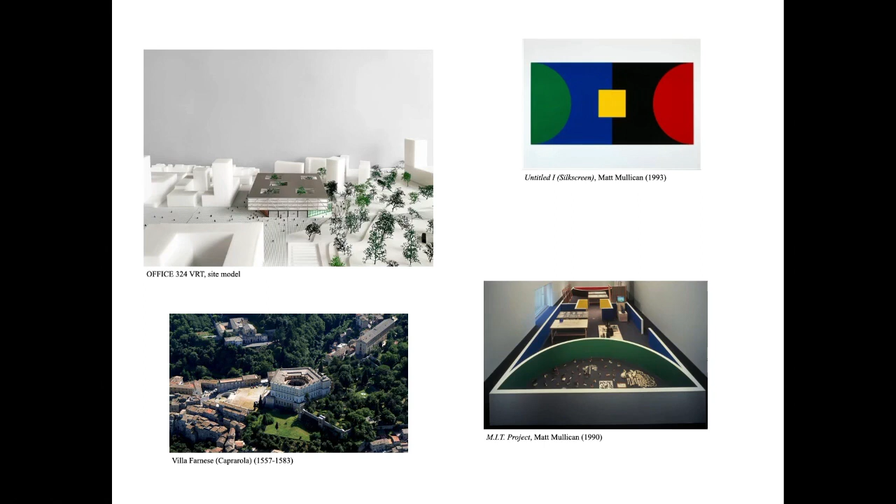And so the pizza box on the octagon kind of makes a building which has no real front or back facade. That was very important.

So the figure here somehow relates to the park which already exists, creating this new idea towards the front park to be built, but also towards the back, which is not a back anymore in our building, which is this set of social housing blocks with this added tower that's still not built, but that's the plan in the current scheme, not our scheme. So that was interesting, you see them here.

So since we started with the RTS building, it's a building designed almost 10 years later. On the one hand, some things changed. On the other hand, things stayed the same.

This building is of course in Belgium, not Switzerland. So it's a very dense, very physical building below with all these big auditoria. There's no plug-in trucks yet in Belgium, so it's all a bit more old-fashioned. But in a way, this fortress, the octagon, has all its public entrances on 0 and -1, which is another 0 on this side, because these studios are one floor down with a canyon in front, where Matt Mullican is doing the artwork for. It's a very basic fortress, very physical, very finished, very final.

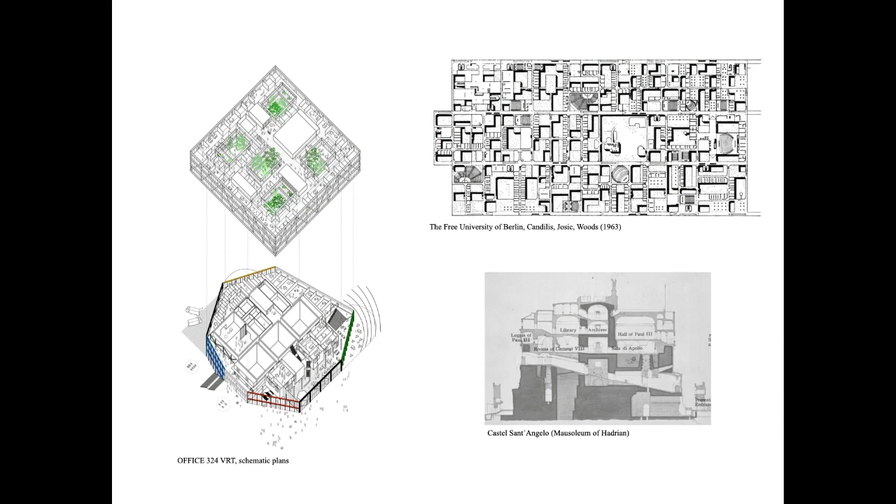And then there are 3 floors of this gigantic pizza box, 100 by 100 meters, which is in a way an endless mat building where the only thing that really defines it is these 5 gardens. These gardens organize the space, all the rest changes so often, so much. We learned that from RTS at least, so that's what happens here.

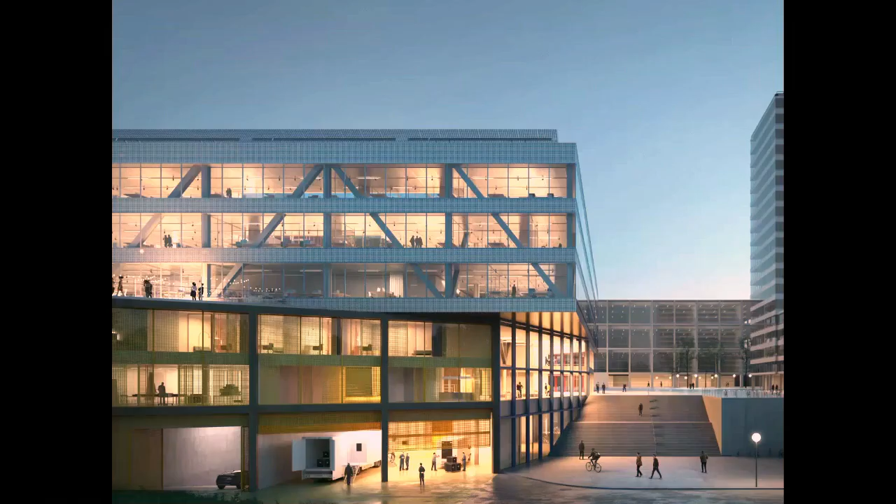So we go quickly, that's the new situation on square level, that was on the park level. This is the back, where it's in a way 1 floor higher with entrances here and the steps. This topography is in a way given, and we try to use it to our advantage.

This is this set of these studios, you can just see them here. They're not yet accessible, we have to take down these stairs. This is this ground floor level with this park we developed together with Bas Smets again. And then this is this other side, so here you see that, the entrance again.

And then you go to this big event hall in the back, which if you're interested, you saw here, which is the only one on the ground level where you walk around. And then here already are the loges, which are part of the system of the other side. So here you go down in this canyon, these are where the studios are.

And then you see that actually the building, like this gigantic castle or this fortress or whatever, it's even 1/3 bigger than you thought it was. So it's in a way a massive building, I think 50,000 square meters. So you see that here, you see that street is in a way that street.

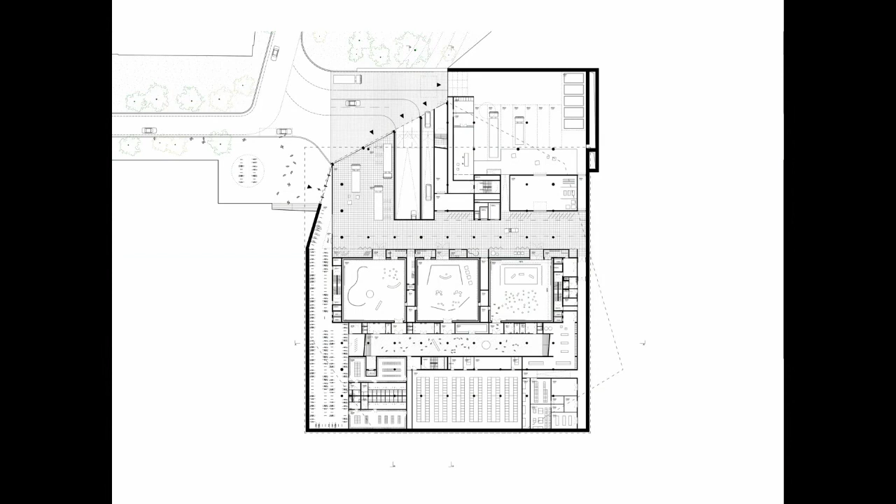We introduced this kind of octagonal column anywhere where we are under the octagon, which somehow gives a sense of idea in this kind of ground floor. And then you have this big space, 100 by 100 meters, which is in a way only designed by this staircase and these 5 patios.

See these patios here. Everything else, quite frankly, again based on Lausanne, is bound to change. So this is the architecture. The architecture in this enormous size is nothing more in a way than these gardens. But of course they have to be well designed. They're stepped gardens, they have their own materiality. And we take care of the rest, of course. But it's important to understand that the form of these gardens defines its sense of collectivity, its civicness.

Using these gardens here in this housing complex in Ghent, you could see a bit the same. I didn't show any single individual house, but some people who know our work a bit know that we've been many years working on these houses of the same rooms and similar, and rooms in rooms and dimensions of rooms.

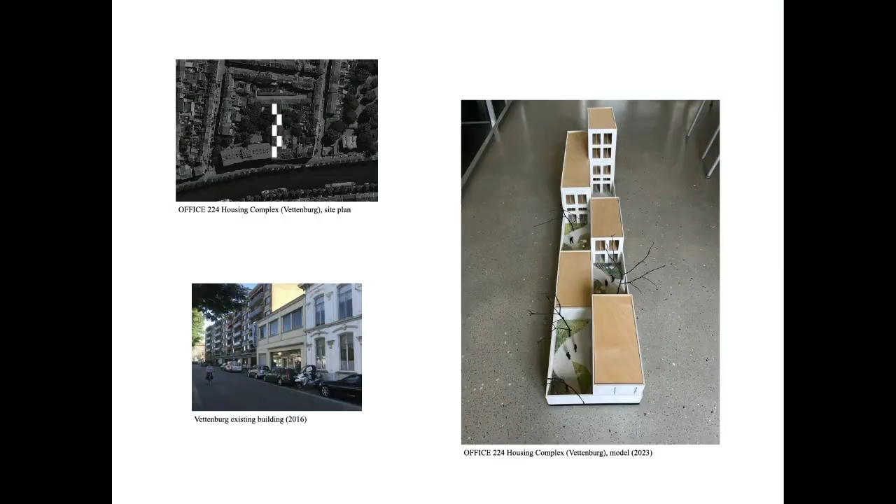It was interesting in this regard, I think, in the idea of the big house in the large city, that here the house becomes big in so much that it's co-op housing, many houses, I mean 6 families, sharing gardens, an early project of that, early version, old project here with this idea of garden. Here this first collage of garden, a garden which we'll still show. I'm sorry, there's still something coming.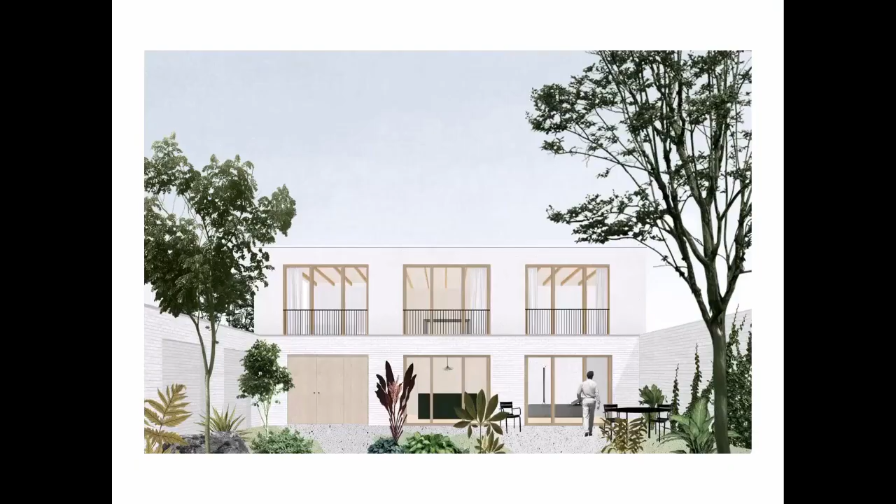And then you see here that in a way this house, these former rooms become in a way houses, and the gardens, in a way as deep as you can go inside the plot, define the architecture.

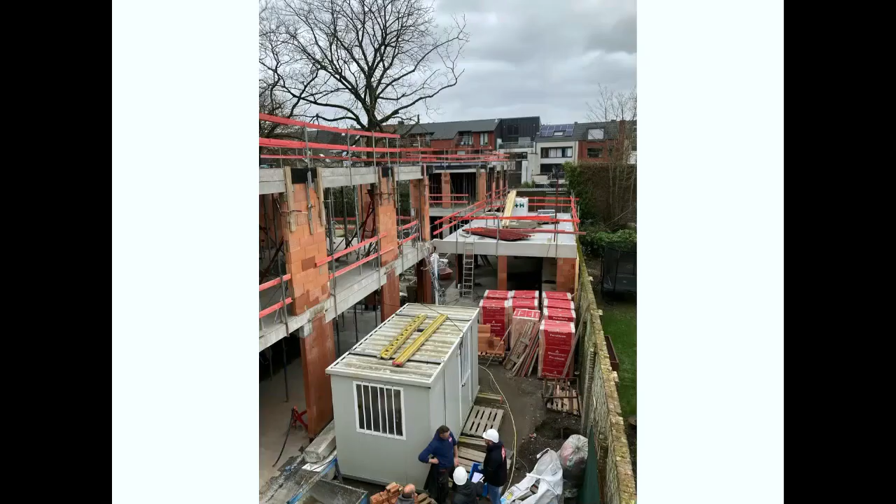So the figure is so big, but at the same time there's the desire to organize it, with these gardens forcing people to communicate, because you have to walk from garden to garden to get to your house. It's a weird idea of sharing, which you accept because with it comes an amazing quality of living in an otherwise extremely simple warehouse-like house, as you see here under construction.

These are quite recent pictures from the last couple of weeks. The garden brings me then, as an intermezzo like the drying hall was, to this library which we recently finished in St. Martens-Latem. It's a big house par excellence, the biggest house in the area.

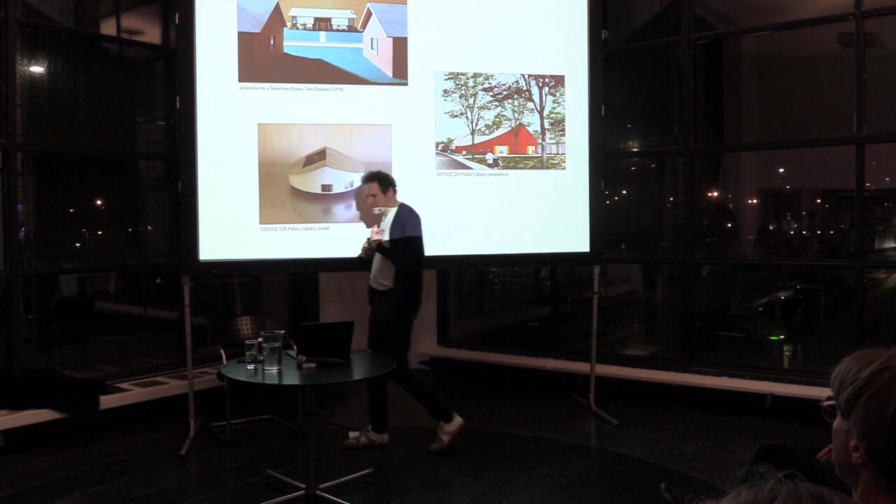You see it here. It's a house that tries to deal with the problem of what is public in our contemporary world. This famous Dan Graham alteration of a suburban house settles the argument: you take away the facade and all of a sudden everything is exposed.

The question we would raise, implicit in many other questions too, is: a building which has to have a civic role, does it have to be so transparent? Does it have to be so giving? Or does it need a threshold to negotiate, to give protection, to organize, to bring in hierarchy? We believe, obviously, the latter.

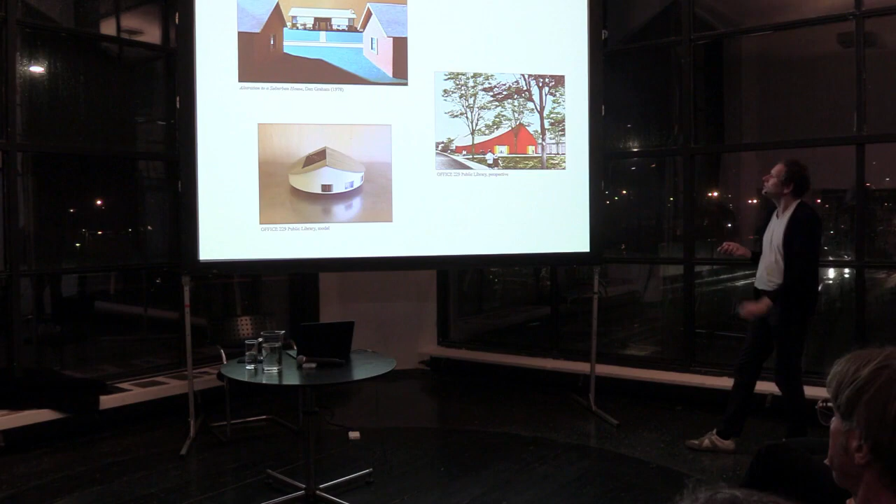So what happened was this competition we did, for a library for this city, this village, St. Martens-Latem. It's a kind of small city, and an interesting place in that many rich people live there but don't pay taxes. As a result, there's no money for infrastructure, so it took them 15 years to get money together to build a library, which is a bit sad if you ask me.

And even then, they had to negotiate with the school in the back to maybe combine the library with some extra classrooms. So that was the brief: after many years of negotiation, library and extra classrooms, and then probably, if it could be, perhaps cheap.

So we said, okay, it's important to make this the biggest house in a way, a city only made by houses - big villas in some sense, as you see here. And turn, in a way, the main feature, the library garden where you could read books, into the center part of it. You see that here in the early collage, this is a later image but it's kind of the same idea.

So it didn't really change - this was the competition. But make it only accessible through the threshold of the building itself, as you see here.

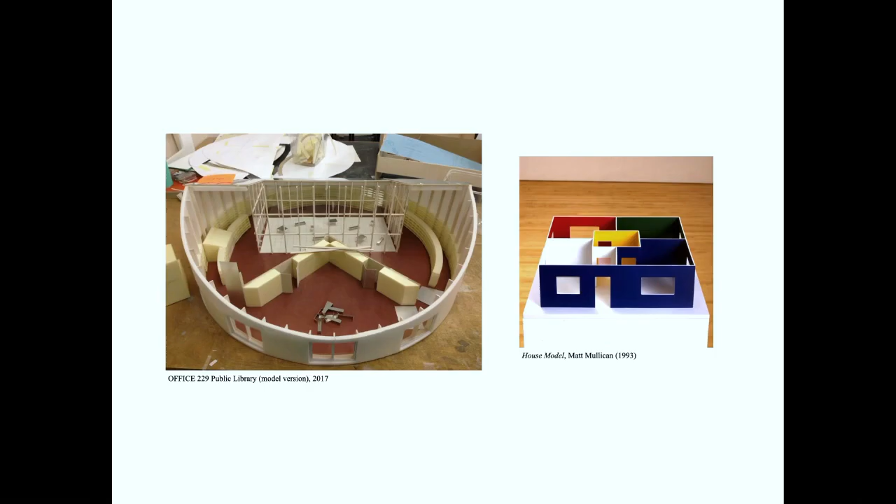Many versions - Mullican here around the corner. The court is in a way half of the square side. We did some tests before we got there, a bit of Rita McBride here, actually an artwork placed there by Richard Venlet later, more recently. Then you see the square in the circle, another quarter cut out for the refectory for the school in back, a stair to 3 extra classrooms for that school, the patio, the court, the garden.

And then that relationship between the building itself, which is in a way a gigantic shelf - the books carry the building, Lawrence Weiner style, so to speak. The books carry the building, and that's it, which is of course a very beautiful idea, and a nightmare when you want to build it, because shelves carrying architecture never works. But we somehow managed after many negotiations, because woodwork and its precision, shelf work, and architecture and its precision - apart from Japan maybe, these are a hard match.

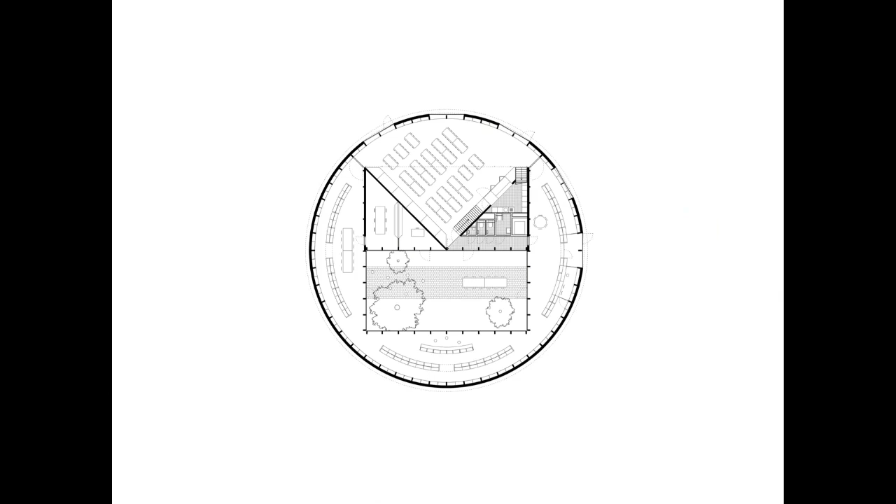But okay, so the court, the librarian space, the whole bookshelf all around. The refectory, which can also be an event space for poetry reading or anything - the toilets and a little kitchenette for the refectory, for the school. And as you can see, only here the entrance opening and then a few openings, one which still shows a glimpse of the library, and then only openings towards the school.

So literally, a library as a big house, a house which negotiates between what is an idea of civic in a place which has almost nothing. Not far away from what we saw in the beginning, the mega factory, the satellite factory, which due to its size, its appearance, what it shows and what it doesn't, whether it's the bridge and the parking lot, or in this case the opening and the entrance, desperately tries to renegotiate an idea of the collective, of the public.

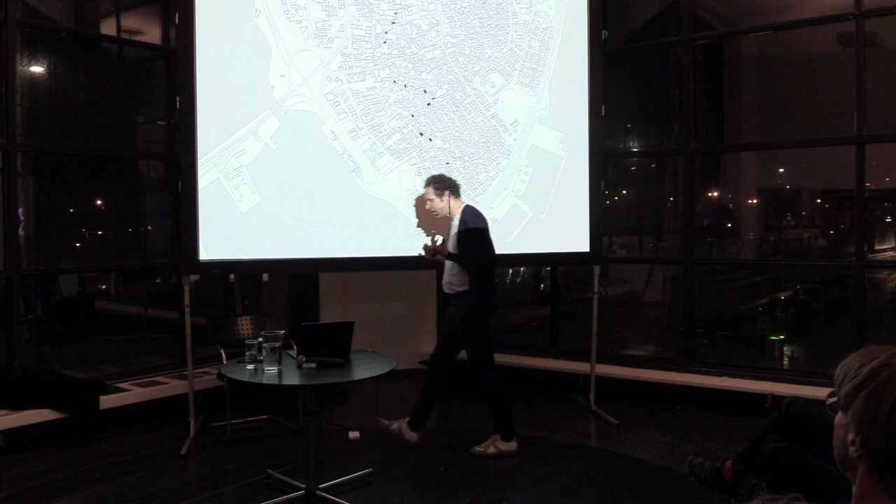At the same time, we felt that if you would do that too literal, you would in a way kill that fabric, with fairly poor inhabitants. So at the same time, we thought it was an opportunity. How would you make a route? Almost like crumbles, you know, how can you make crumbles, point by point by point. And could you use it as a kind of city renewal thing?

In other words, transforming all these spots, often close to these kind of particular buildings, as small squares. You see them all here in black, 23 in total, as little rooms in the city, as green rooms in a place which has hardly any of it. Green rooms, meaning all the ideas of ours, projects we did in the past, but also how green used to be in that part of the world and not anymore.

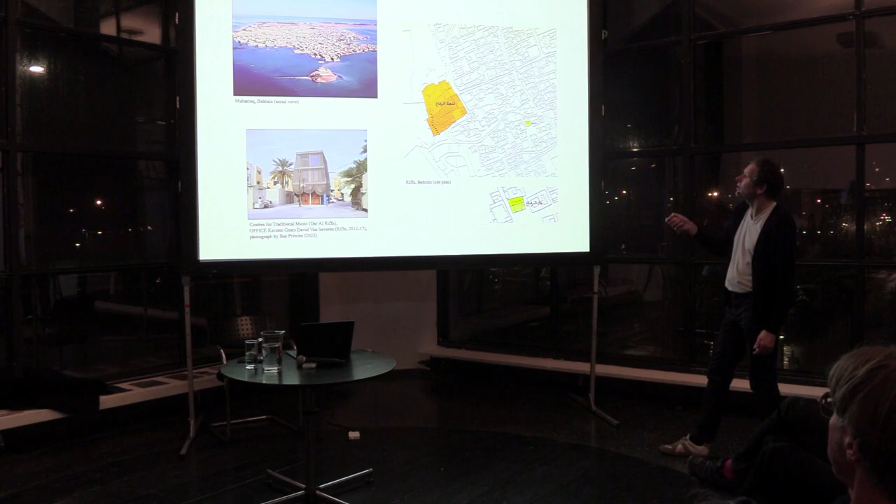Here you see how that part, Muharraq in Bahrain, was before they built a gigantic highway around it, which is what you see here. So actually, that disconnected it from the castle. I come back to that, so we had to invent a bridge.

Here you see one of these dars, which we built in the same context. Actually, this one is in Riffa, not in Muharraq, but we made another one also there.

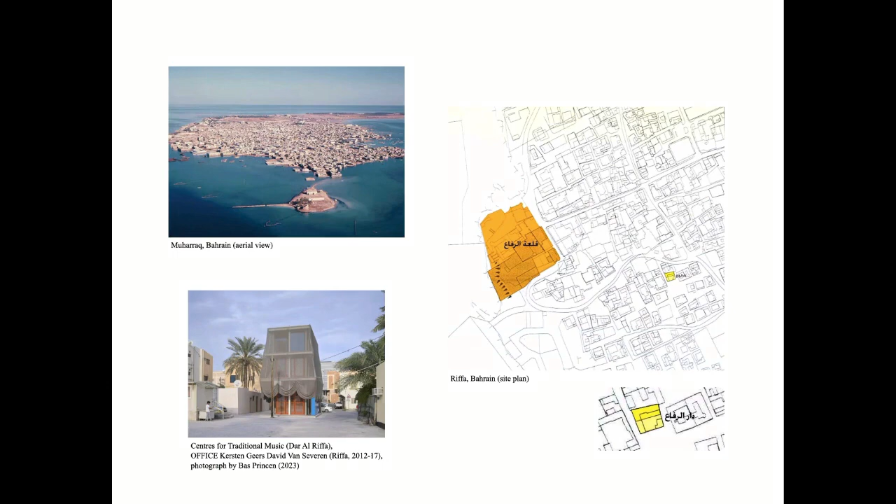This one is actually in Muharraq. This is pearling, and nowadays the music they make is interesting, the clapping and how the music is made. But again, more interesting for me is how you could make this path and use it to introduce a set of spaces, a set of urban spaces, a set of living rooms almost, so to speak, in this context.

So here you see the early collages, and here you see how the project came about. In a way, we made always almost like these carpets, carpets of trees and light columns, and then dot-like points which connected these. So 23 squares, always the lamps, and the lamps are far enough from each other that when you're on one, you see the other. At the same time, they do not disturb, so they're part of the urban fabric. If you do not know, they just seem to be lights.

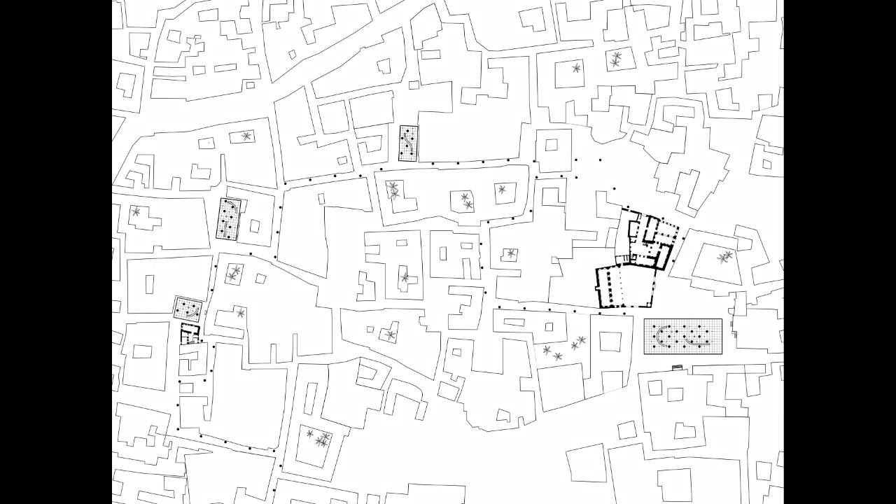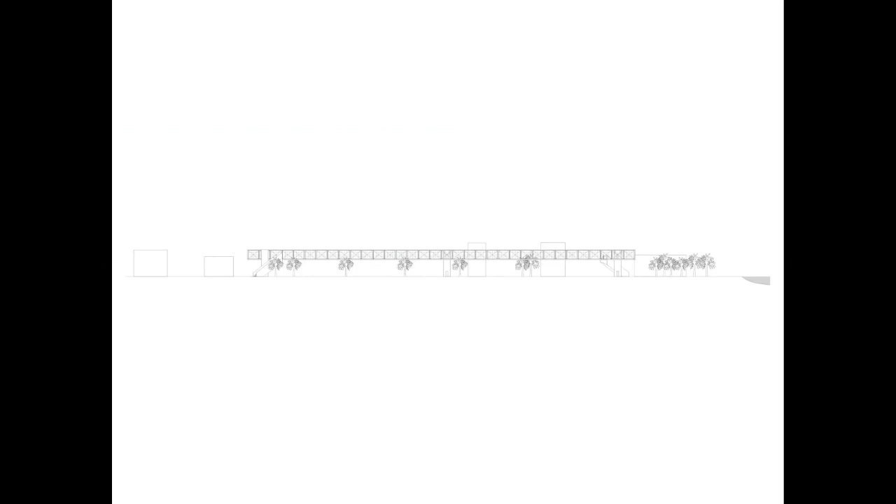And so indeed, we had that problem that we had to bridge this gigantic added land, this highway. So we made this, you follow the lamps all the time, and then, well, there's this enormous bridge. It's a pedestrian bridge which makes you cross these roads and arrive at the castle, which was actually part of that whole pearling area, the remains of the castle, and connects with the water. So you see that here, you see what's left over of the castle, and you see that bridge.

The castle brings me to one last comment, and that's really 4 more slides, and then it's over for you guys, so don't worry. So the castle, I guess, gives me that reflection of this house, this big house, this small house, the question of the size of the house, and always this gesture. And then even at the smallest of them all, and it's the only house, it's hardly a house, it's actually an artist studio, can have, to a certain extent, that symbolic impact, even though it's very abstract.

So here, a very small project, we now start building in a few weeks for an artist called Rinus Van de Velde. In this area, which is now prone to inundation, we have these areas, the land is often very low, close to the rivers. People build very irresponsibly, and so when the water is high, big parts inundate.

So also, strangely enough, here there was a house. There are all these houses there, in a way in a dangerous area. Now, weirdly enough, the artist, perhaps using his fame in some sense, could convince the local authorities that he could still build there. That was interesting, but at the same time problematic. But maybe you could argue that the fact that it's his studio and to a certain extent a representative building, it became somehow a symbol. So we were fascinated by that. Can that house become also a symbol, almost an indication, like the fortress you just saw, of the very problem of the site?

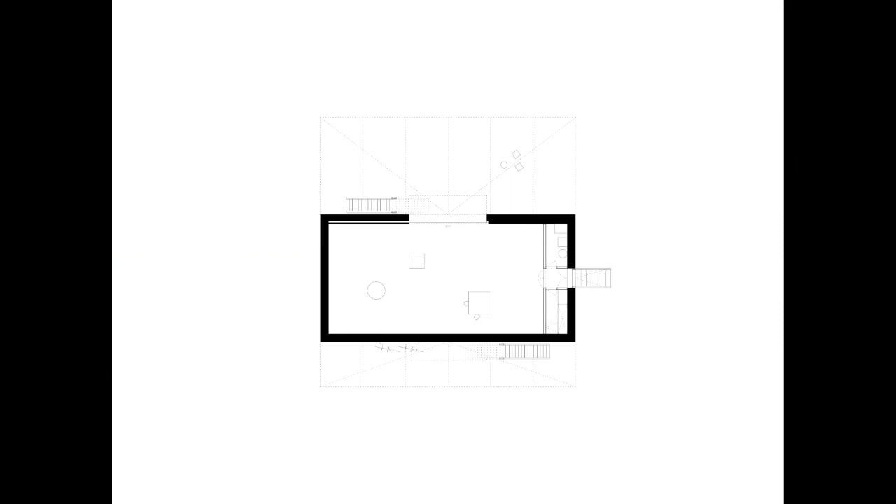So we made a very simple studio with a kind of little unit where he could stay on the floor. It's just 2 rooms. There's nothing there, just a few cupboards, one opening and two openings. An entrance here on the side, the stair, as you can see, which you can really see is a stair, and then 2 stairs to go to the top, one side or the other side. You need the stairs. There's no connection between the 2 floors.